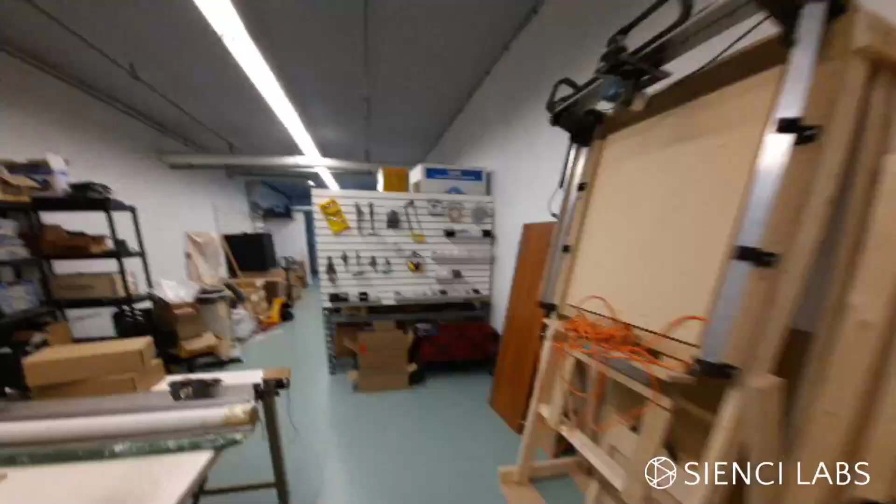You probably are used to seeing our old setup, and we worked a couple late nights in order to move into the new area as quickly as possible. You can see this is our new shop area. Tools and whatnot.

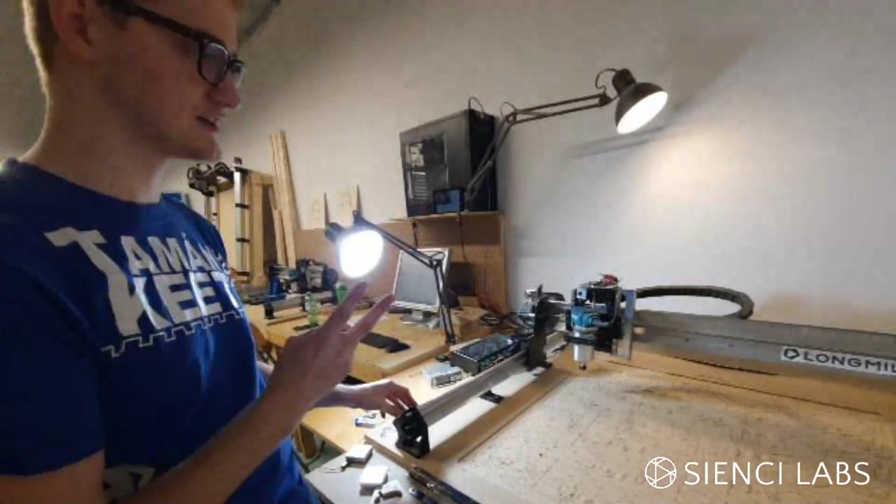So this is our machine setup, and whenever you're coming fresh to your machine, there's a couple really important things you want to check to make sure it's operating properly. It has to ensure nothing's going to fall apart while you're cutting, and also that your machine is going to be working as precisely as it can. The two primary things are the anti-backlash nuts and the V-wheels.

So usually what I like to do is go around and push back and forth on the gantries of each axis. I'm not sure if you can see it, but this is actually wiggling back and forth a little bit right now, ever so slightly. You can feel it more with your hands, and you can kind of hear it as well, that it's got some movement back and forth.

So I've got the sized Allen key to use, and I'm just going to stick it into the set screw in the back there, and tighten it just a bit, a small amount, and then go and feel it again. It's still rocking just a little bit, so I'll give it a bit more of a turn, and it's still rocking a little bit more.

I think you're rocking the table. There we go. Now it's tightened up, I can't hear any looseness, I can't hear the rocking sound anymore. So now I know that the anti-backlash flange is actually tightened up against the screw, and this is going to ensure there's no looseness in the cuts when I'm making the cuts.

So now that I've checked that side, I want to make sure I check the other sides as well. This one also is a bit loose, you can barely hear it. So I'm just going to go in and tighten this down. There we go.

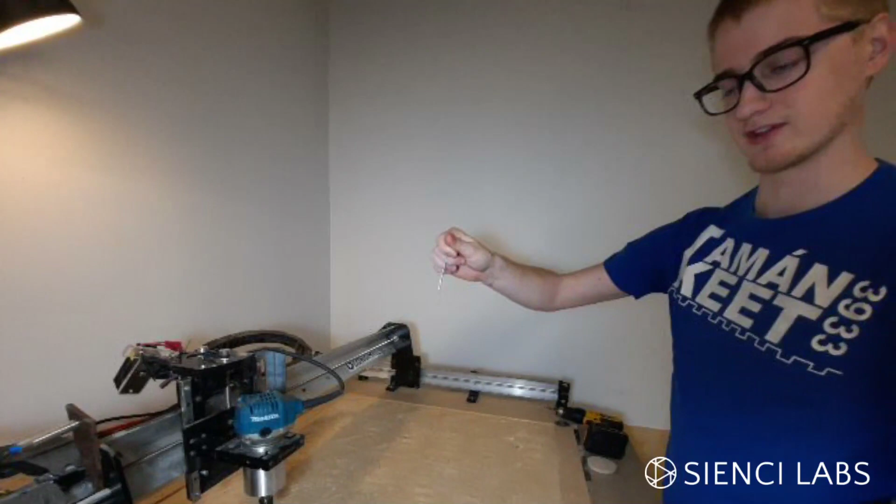There's really no hard and fast rule here, other than you don't want to over tighten it, and that's why every time I'm feeling these out, I'm rocking it and making sure it's still loose, then tightening it the smallest amount of a turn, feeling it again, turning it the smallest amount again, and I just keep going until that rocking noise is gone and I can feel it's not moving back and forth anymore, and that's where I know to leave it.

So I'll do it on the Z-axis. Z-axis is very tight. X-axis is also tight. So those anti-backlash nuts are all tightened.

The next thing I want to go around and check is the V-wheels. For that I need the larger size Allen key here. Where's the Longmill wrench? Let me see.

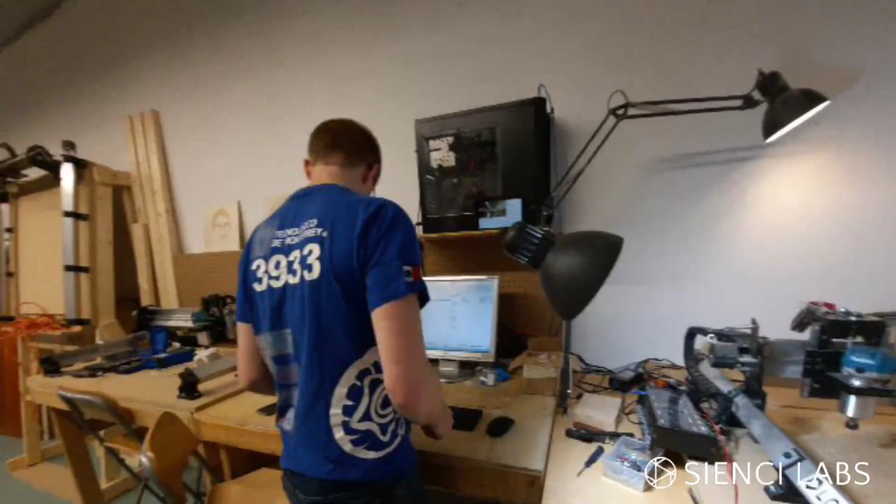You want me to just use a regular wrench for now? Yeah, I suppose I don't actually... use this guy. I suppose I must have lost our Longmill wrench somewhere in the move, which sucks.

They're very, very handy for doing these adjustments. Alright, so I have my 4 size Allen key and my 8 size wrench. So when I want to check the tightness of the wheels, this is something you're going by on feel. The feel is basically, can you move the wheel with your hand so that it's not really easy, but it's not impossible to move either. And so I'll start again on this gantry here.

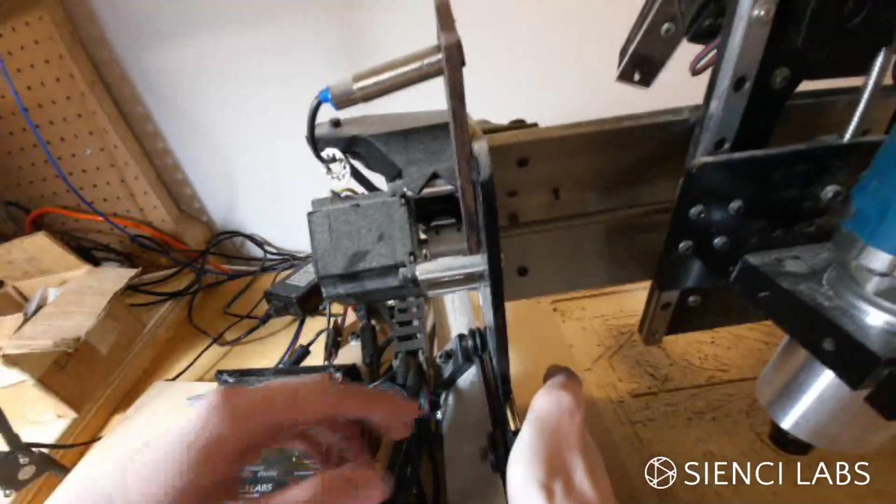What I'm going to do is check the top wheels first. When checking the top wheels, I'm actually going to pull up on the bottom of the gantry to alleviate some of the weight that's on the gantry, because the wheel might feel tighter than it actually is if the weight of the machine is pressing down on it. So I'm just going to hold it up and go to twist it. This one, I have to work kind of hard to twist it, but it still rotates.

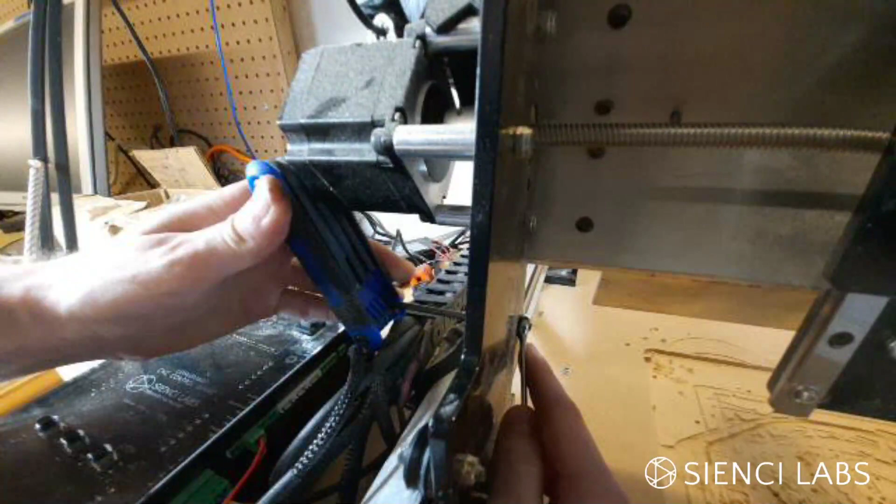And I'm going to try this back one here. This one I can twist quite easily actually, so I can tell this one is loose. What I'm going to do then is stick the wrench on this side and the Allen key on this side, and open the wheel up. I'm going to loosen it, then rotate the wrench just a little bit and tighten it back down. As you guys know, by rotating the wrench, it uses the eccentricity of the nut in order to clamp down better.

And now I'm going to go feel this, and it looks like it's still a little loose there. So once again, this is one of those things where you just kind of take your time with. Let me see here. Let's see if I've got it good there. Oh, that's still quite loose.

Okay, now that I would say is a little bit too tight. I have to really try to rotate that even when I'm pushing the weight up off the machine. So at that point, I can just back it off a little, tighten it back down, and now that's at a good tightness.

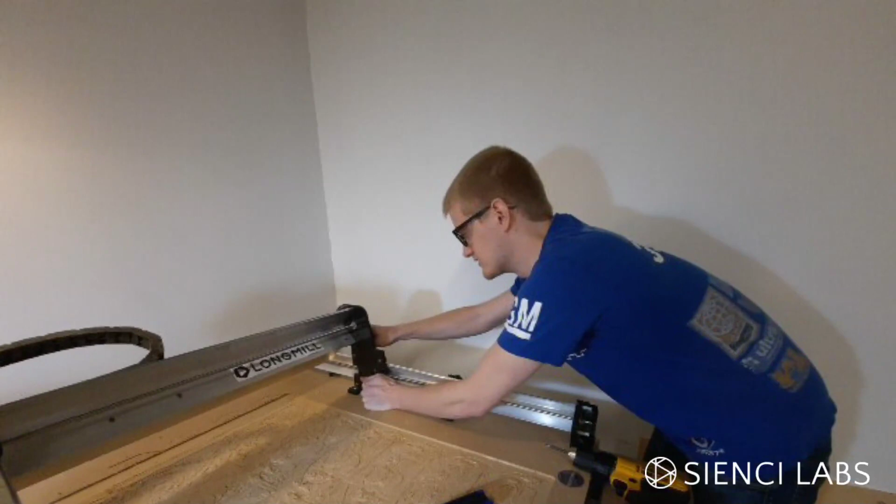Let me just go and check the other wheels to make sure everything else is good. Oh, this one's quite loose. Back one here is good. There's probably some looseness in our setup here because the machine moved around quite a bit to get it from the old space to where it is now. So that has an effect on it as well.

The reason you only need to check one side is because if I'm pushing up to negate the weight of the machine on the bottom, then as long as these top two feel good, once I let go, the bottom two should also feel good. If you'd like, you can also double check the bottom wheels — they should also be able to move quite easily.

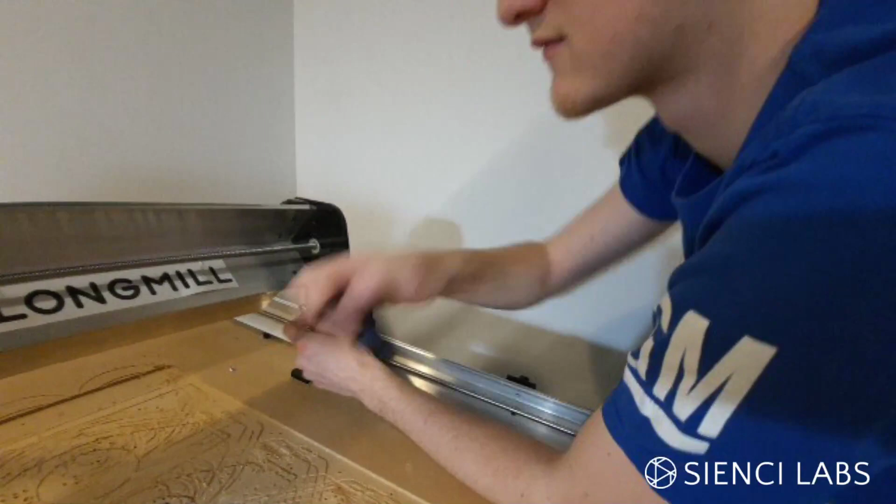Actually, I can feel this back wheel is very, very loose, and that means I should be tightening down the top some more on this wheel here. Okay, I might have gone a bit overboard on that tightening. A little bit less than that. Yeah, that's good now, okay.

And I'll just double check these wheels here as well. Okay, yeah, these are all looking good right now.

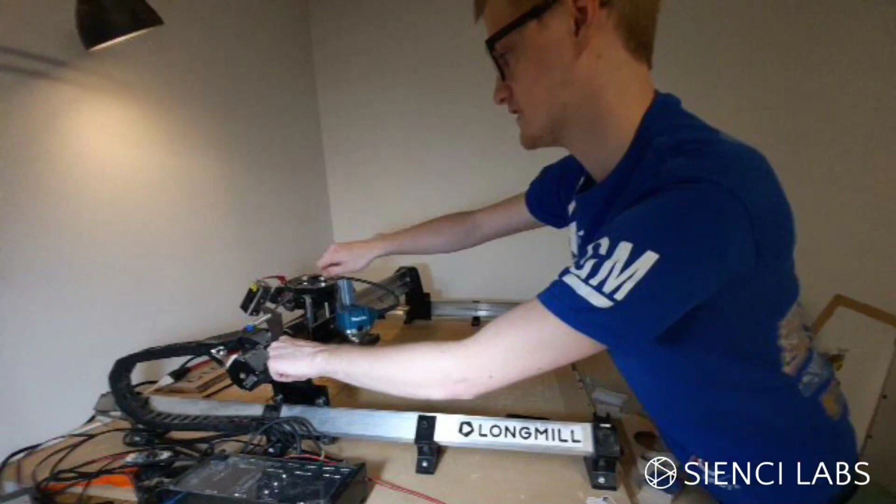So the other thing you want to check as a maintenance run — well, there's two other things. One is looseness in any of the parts, and the other is the cleanliness of the rails. For looseness of the parts, you can mostly just go around to any of your general components and try to move them around. I usually focus on the drive systems.

Most of the components are held in with nylon lock nuts, and if you assembled them with Loctite, then that would also be held in place as well.

I think the only parts that come loose more often than not are maybe the bolts that hold the dust shoe mount in place. But yeah, you can see that was very quick - I just went over and felt if anything was loose, and it all seems pretty tight.

The last thing I'm going to have to do now is clean the rails. These ones aren't very dirty right now, but if you can get a close shot, you can kind of see the blackness on the rails. Oh, you can see it at the back there much better.

So you can see there's kind of this - here, can I show it from this side? Can you see the blackness here on the rail, these little specks?

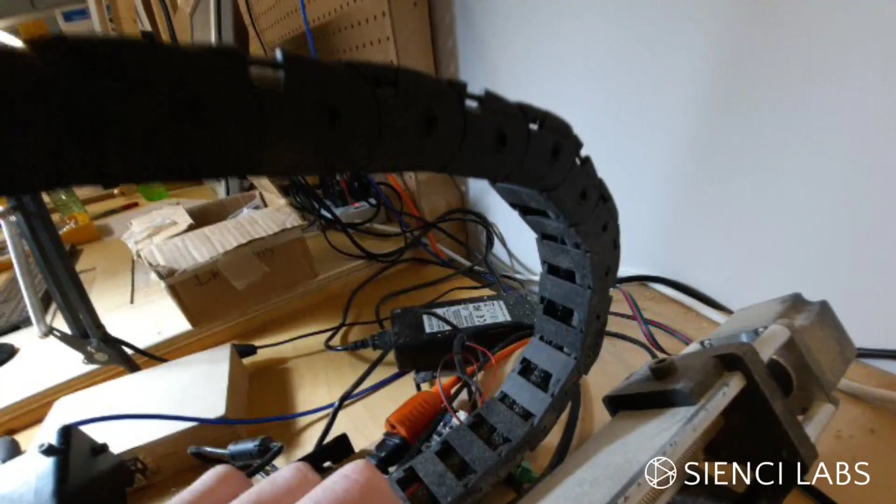This is mostly coming from dust and debris that is flying off when you're cutting on the machine, landing on the rails, and then the wheels pack these down onto the rail. But it's very easy to remove. Give that back over to Andy.

The way you need to remove it is you just use any dull object you have on hand. You can use a plastic scraper, a toothbrush, something like that. I actually use these wooden discs because they come out in the middle of the dust shoe.

The thing you just don't want to do is use a steel tool or something like that, because then you're going to start to mar the aluminum. But basically you just want to go around and push against the particles that are built up on the rail, just to knock them free.

And you can see that they just kind of fall off quite easily. I'll do that at the back here too.

The reason for cleaning off the rails is just because if it starts to really build up - like the current state on our machine, this is probably completely okay.

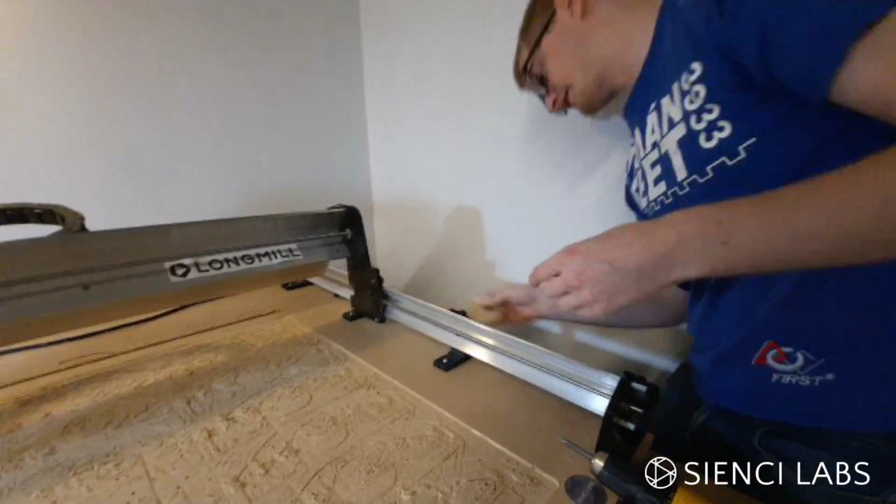Now, once again, this is directly correlated to how often you're using your machine. If you're not using dust collection, then you're going to have to do cleanup on these more often than if you are using dust collection.

You can see it's kind of built up here on the disc, and you can see the particles are kind of loose on there. But yeah, that's about it. You should be able to put your hand on the router here and move it around and feel that everything's quite tight now - nothing should be able to move around.

I think the only other piece of machine maintenance that you do much more occasionally than this main set of steps is occasionally resurfacing your spoil board, which would probably be a good idea for us.

This is a very well used spoil board. So those are the steps that I can think of for now.

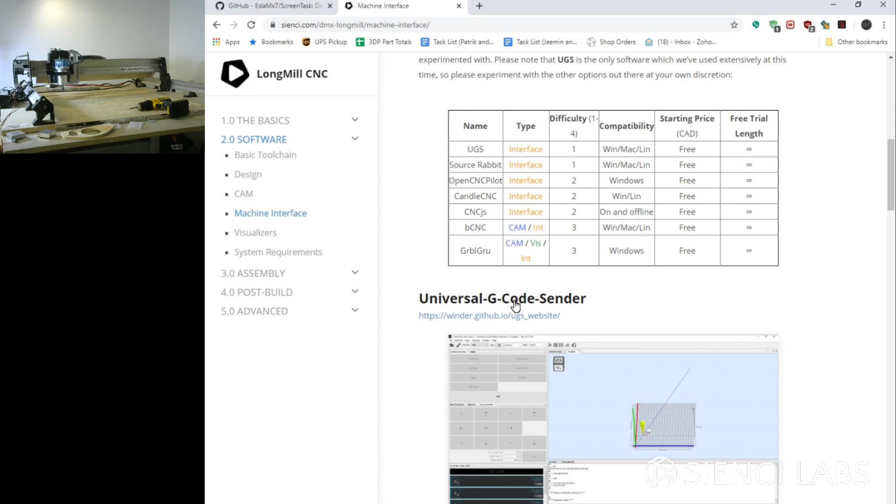Before I dive into this, I want to remind you that there's actually a page on the resources that shows a list of all the different interface softwares that we've tested with our machine and that you can use. If you don't want to use UGS, you can use one of these other ones, and they have their perks. Some people prefer one over the other. I know a couple of our customers really like using CNCJS, but keep in mind that it's a web-based sender, and some other people like using bCNC or Candle. We prefer Universal G-code Sender, and that's why we show you how to use it. So check this out if you want to try out another G-code sending software.

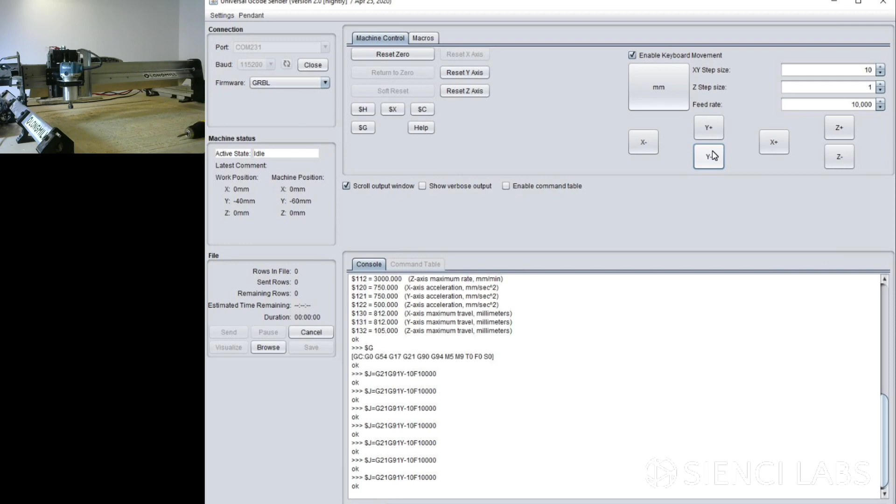Okay, so if I press Y minus, you can see that it's moving by 10 millimeters at a time in the Y minus direction, which is towards you. And if I hit X plus, that moves the X axis in the positive direction, which is to the right.

If I hit Z, you can see it's moving by just 1 millimeter up or down. You can kind of just toggle this around, and that's very simple machine movement that you're achieving.

If you want to move a little bit faster, you can click it a bit more, or if you'd like to set this to a lower number, like 1 millimeter, you can press and hold. Actually, I think I have to set it to a minimum of about 5 millimeters.

It'll just keep jogging based on the quantity you enter in. So if you want faster movements, you can set it to a larger quantity and make it jog by that amount. It's quite simple—this allows you to generally move your machine around to different locations when starting your cutting job.

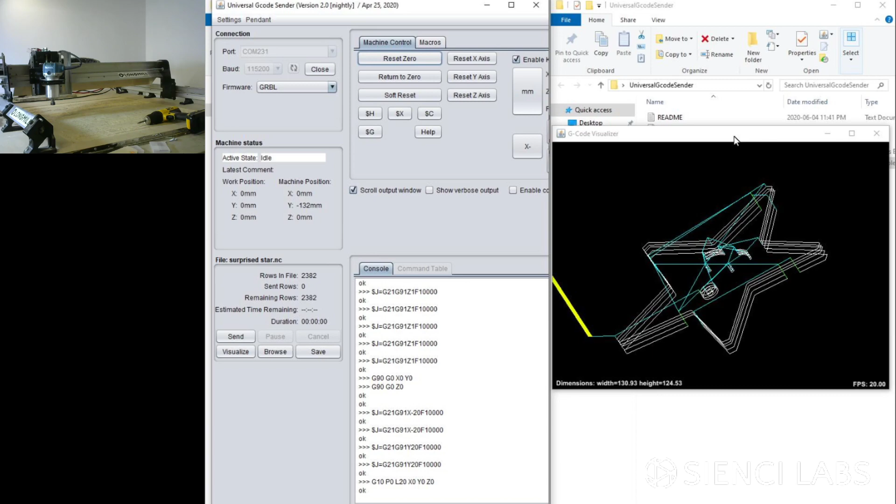Anyway, I'm not going to talk anymore about this because most of our customers use UGSPlatform, and I'm going to explain more of the functionality in UGSPlatform. So I'm just going to close the connection, close this up, and open up UGSPlatform.

Do you want to take a break and show them the vertical? Well, are people asking about that? Okay.

Yeah, so I'm making - how are you, Louie? You camera shy dog.

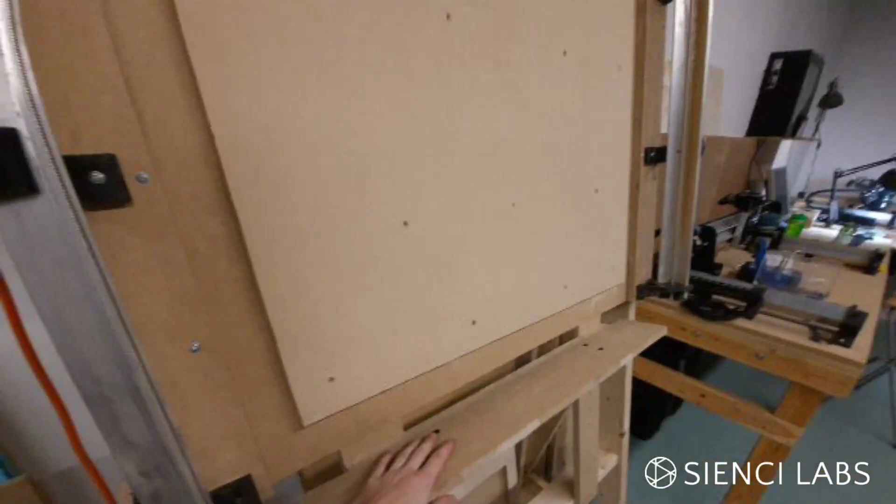This is a vertical mount system that I worked to put together. I am going to be making a video on it - well, I've already started working on the video, and I'm going to be releasing that as soon as I can. It's very nice and solid setup, with a good sized waste board. You can see that even with the power off to the machine, it's on just a slight angle and able to stand up on its own. It's also got a little shelf here, so that when you load the material onto it - the thing about a vertical setup is it's hard to hold the material in place while you're finding a way to fasten it down to the table itself. So I've got this shelf, and it's actually got adjustable height, so if your material is a little bit longer, you can toggle the shelf height accordingly. It's also nice to hold your tools and stuff up here while you're fastening everything in place.

All right, back to the regular programming. Your regularly scheduled program.

Okay, so you can see that UGSPlatform is loaded up, and obviously it gives me the message as well.

For UGSPlatform, we use the nightly build of version 2 for November 15th. That's the one we've been running for a long time. Some people ask which one we use, so that's the one we use. But the one that's on the website is from August - I think that one's just a random one, kind of more of a random one. I think, since it's constantly in development, each version of UGS, the nightly build, will have certain issues with it. But this is the one that we've just been running.

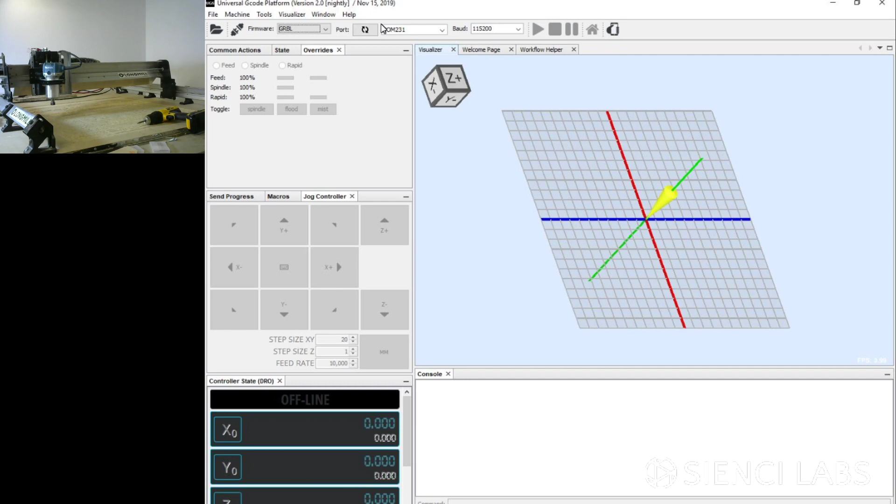In case you're wondering, I wanted to show that when it comes to UGS, you can either go to their downloads page and get their most recent nightly build, or the previous stable versions there. Or if you go to the GitHub, you can also download previous versions of it as well.

So I've got UGSPlatform open. You can see that there's a little bit more happening here. It's why I wanted to start with UGS Classic, because it's a bit more digestible. But by having a lot more content, Platform also has a lot more in terms of features available to you, the user.

So first you want to start by connecting to your machine as we did before. We're going to start at the top here, hit refresh, toggle down, we can see the machine here, and then we're going to go over to this little plug symbol and plug in. We're going to connect to the machine. Once again, you can see it's popped up here, our opening message, and we've got this little orange symbol that has appeared showing that the two ends are plugged in, which means we're good to go.

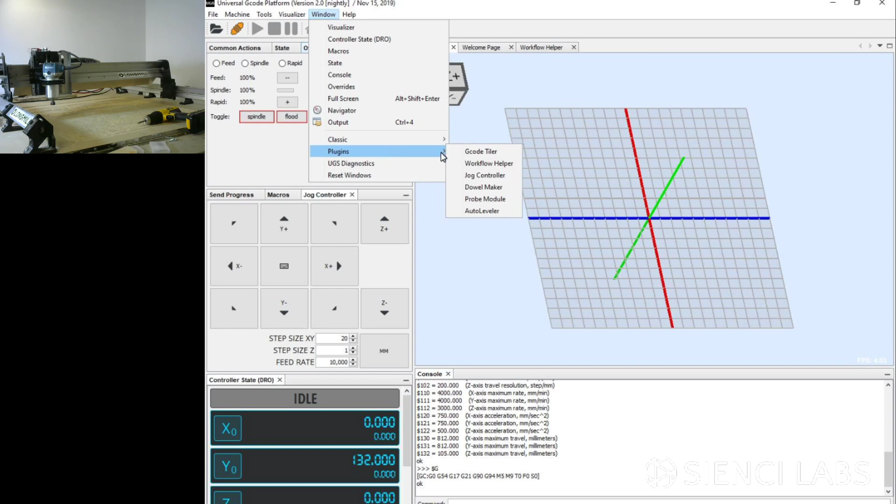If at any point you don't see a window here that you need, for example I don't see the probing module here, I can go to the window menu, go to my probe module, click that, and now you can see it's going to pop up here.

You can also get rid of any of these windows at any point and drag them into different positions. For example, I don't think I really need this welcome page, although you might want it, but I'm just going to get rid of it. I don't think I need the workflow helper. I like having the visualization window quite large, but maybe not that large, so I'm going to grab these lines here and stick it into the corner. I use jogging all the time, so maybe I'll grab this and make it a tab up here.

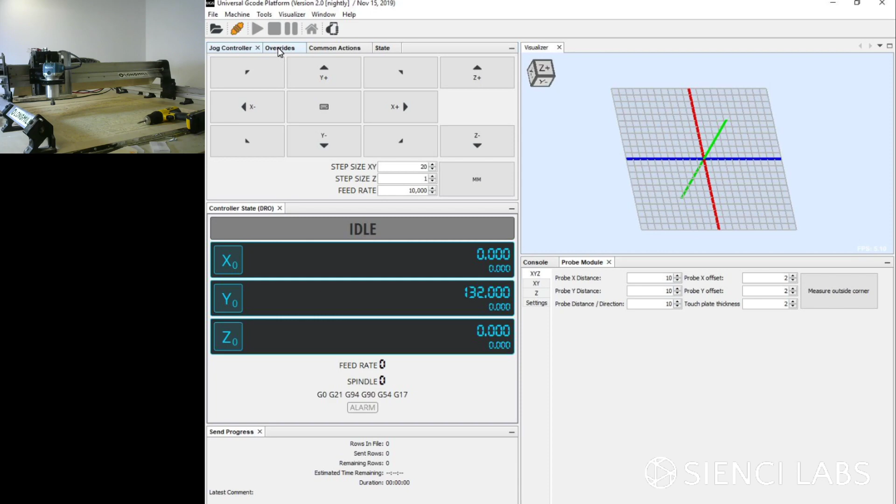I don't tend to use macros, so I'll get rid of that. I like to see my controller state, so maybe I'll make that a window further up here that I can see more easily. Overrides are quite useful, so maybe I'll make that a tab closer to my jog controller. Common actions are also quite useful, so maybe I'll make that its own window down here. You can see I can do basically anything I'd like to make this work the way I want it to.

So let me explain. Now that I've set it up in a way that I tend to use UGS, I can explain to you the use case for all of these. Up here you've got your jogging, which is the same as what we used in UGS Classic. And here you've got your machine state, which is also available in UGS Classic. It's going to show you where you're currently positioned. You can see I've got my visualization window here.

If you would like to reset your axes, you can just click these buttons here. Right now it thinks the Y is at 132, but I want to set it to 0. Now you can see that yellow point is set to the 0 point. You can also tell it that it's somewhere else by typing a position in if you'd like, and you can see it's now moved it up by that amount. But I'm going to zero it.

This is the progress as the file's being sent, and these are the common actions once again. I think that's pretty straightforward.

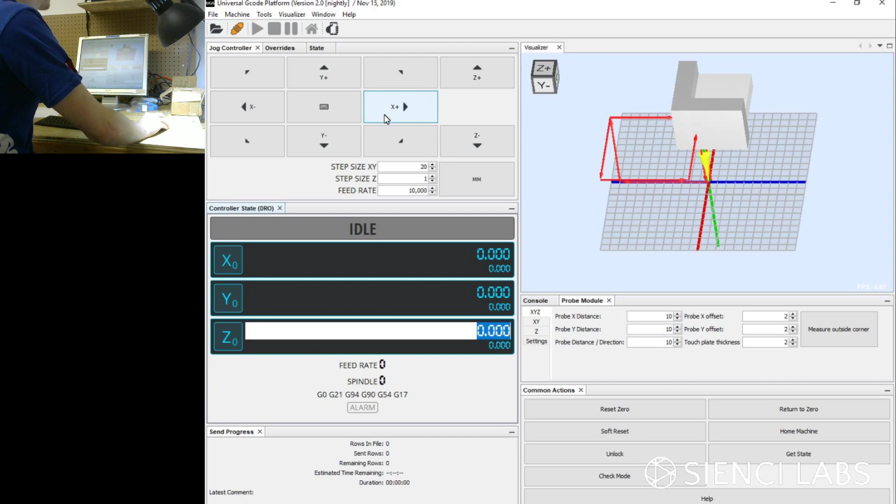What I like about UGSPlatform is that when you go to jog the controller, it's set up so that when you press and hold a button, it'll do a constant jog, and as soon as you let go, it stops. This is very useful because you don't actually have to set your step size if you're just jogging the controller or your machine around. You can set it up wherever you want by just pressing and holding the buttons, and you can do that in any axis. That's quite a nice feature, and it means you don't really need to bother about setting your step size. You can just move it around as you need and place it where you want.

Is there anything? Do any of you have any additional questions about the software? I'm going to explain the probe module in maybe 10-20 minutes, and I'm also going to run a job so you guys can see me actually using UGSPlatform to run a job. But for the time being, is there anything you want me to point out?

I see, Keith, that you want me to show off the pendant feature. While I'm waiting to see if there's any other question coming in, I will set that up. Let me see if I can get it working.

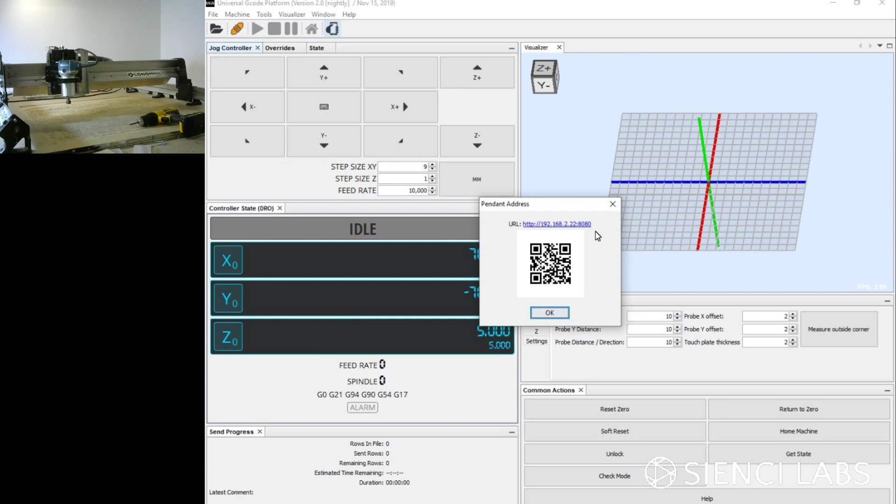I've just opened up my web browser on my phone, and it's set to the same IP address as what's on UGS. So if I click enter, it should be able to find it here. The Wi-Fi here is a bit slow, we're kind of in the other room. Oh, there we go.

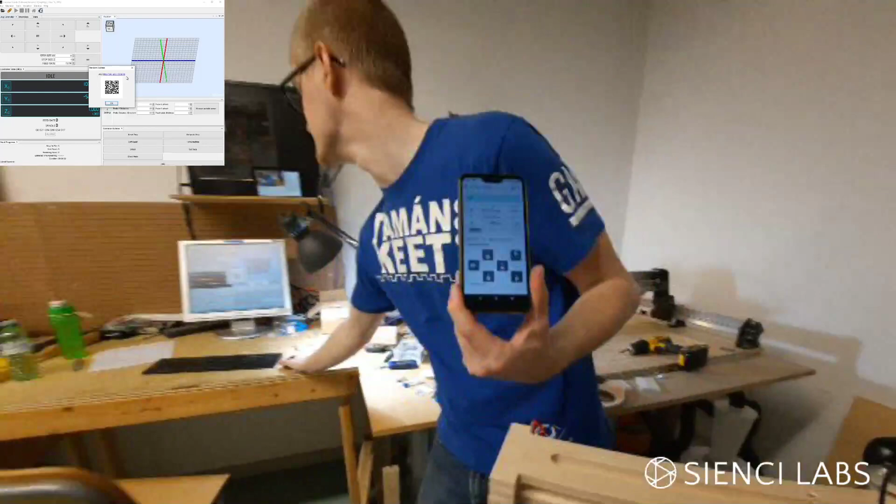You can see you've got a more generic layout here, but you still have tabs to jog, do macros, and send files. If I click jog and press on the X or Y, you can see this is fully controlling the machine, and I'm also getting live feedback on its position. If I close the pendant window on UGSPlatform, the coordinates on my phone match what show up on the computer. And if I jog here, the computer recognizes it as a jog, and the coordinates change appropriately. I can also reset my zero and set my feed rate. I'll reset the zero here, and now you can see on the computer it's also recognized that I'm back at the starting point.

Let me see. All right, well, I guess I'll move on for the time being. I think if you have any other questions that come in, I can answer them.

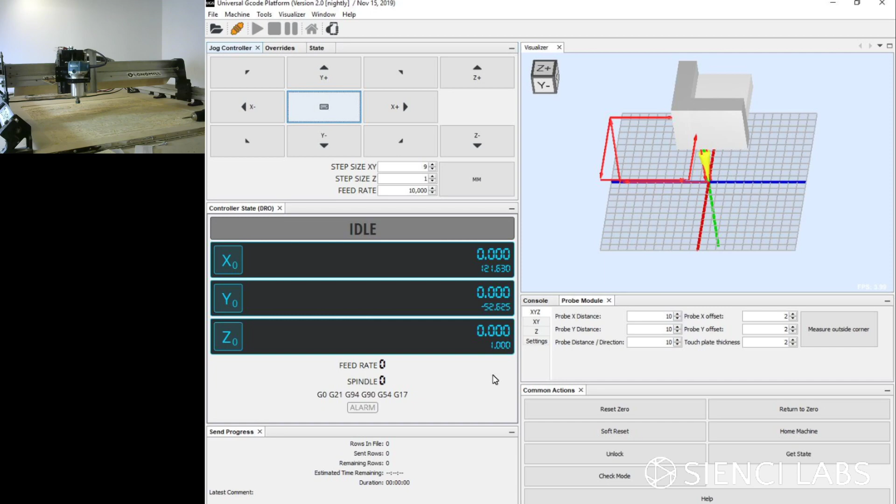What I wanted to show you guys is I was just going to briefly talk about work holding methods. I was going to talk about the bits that we use, and I was also going to show you the touchplate.

As you probably saw before, the go-to work holding method that we like to use here, and as you can also tell based on the number of holes in our wasteboard, is we like screwing things down. It's quite easy, and it allows you to mount things in place without having to really think about it.

Unless you go and drill or cut into where you drilled your holes, right? Yeah, the only downside is you kind of have to be aware of where your screws are when you're cutting, because your bit can run into the screws. So some people might not feel confident about that. I can tell you it still occasionally happens with us, so don't be embarrassed about it.

You know, it's life. That's life. Sometimes you break stuff, and usually when you break stuff, you learn from it. But this is the type of method that I like to use because you can run into problems, sure, but it's also just so easy. It's so easy to just screw it in, and now it's held in place, and you can do what you want to do.

There are some other methods that exist. I don't have too many props with me, but you can use double-sided tape. You can use painter's tape on your flat sheet, and then painter's tape on your spoil board, and then you basically just stick some super glue in between. And if you have an activating agent, you can put the super glue on one side and the activating agent on the other side, and then you just stick them together, and it holds really well. For sheet material, that's a really good method.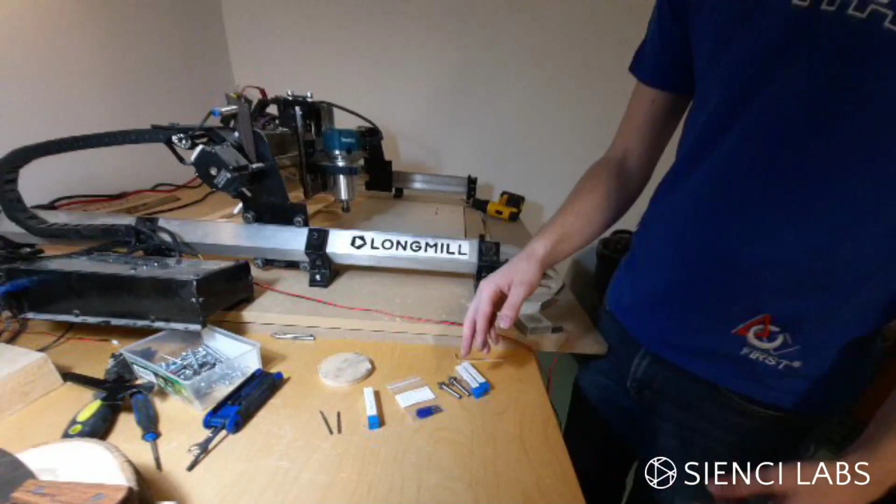Let's take a moment to talk about cutting bits. I've set up some of our cutting bits here, as you can see. When it comes to cutting bits, we stock either 1/8 inch bits, which is these guys here, or 1/4 inch bits, and this is the shank diameter on the bits. The Makita and many other routers by default have a 1/4 inch collet in them. Oh yeah, and the surfacing bit, here's the surfacing bit. We also supply these 1/4 inch to 1/8 inch adapters that allow you to use the 1/8 inch bits.

Let me explain why you might want to use some of these bits. Let me see if there's any other questions. Okay, still no other questions. So the type of cutting that I do, which is usually more functional stuff, like cutting through and making stuff. Do I have any other examples here? Actually, let me go grab some examples real quick.

Oh, we're going on that. Hey, wireless camera, wireless, let's do it.

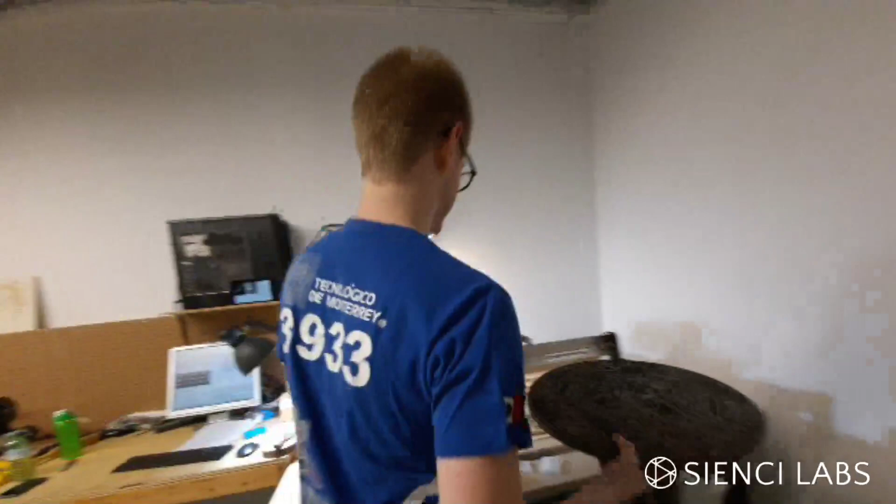Okay, I'm trying to be as thorough as I can here, but if I'm missing anything or if you have any questions, please ask me, because I would really like to be able to tell you guys what kind of bits to use in what situations. I'll start again because I don't remember how much of it you heard, and I've been talking for a while, so who even knows what I said.

Step number one, we got a surfacing bit. Surfacing is for surfacing, that's basically all you use it for. You use it for setting up your spoil board to make sure it's nice and flat, or for flattening large material.

Like this. This is a large piece of raw wood that has been completely flattened. Wow Chris, that's a very flat piece of wood. It is a very flat piece of wood. And that doesn't have any sanding or anything on it, that's just how it came off the machine.

Yeah, surfacing is for surfacing. Alright, that's one bit out of the way. Boom.

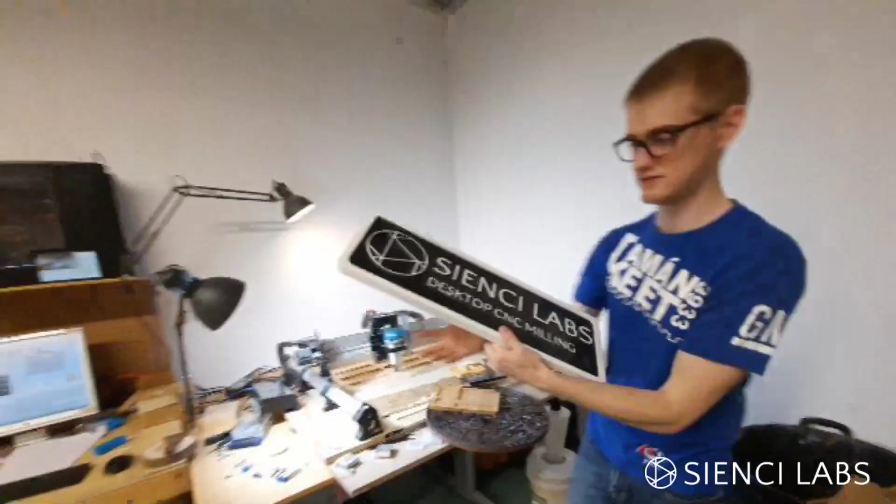This is like an example of what you can do. You cut out this perimeter with a 1/4 inch bit, you cut out the little inside of the tray and the holes here, or this sign here where you've kind of got this raised lettering.

You use the 1/4 inch bit to rough out the material, but then for the small inside edges and the small lettering here, you would use an 1/8 inch bit in order to cut out all this detail that you need. And then you'd certainly use a 1/4 inch bit to cut out the perimeter to finish it off. This is just a single piece of MDF, and then it was just hand painted on the top.

And this is an example where if you have an even smaller bit, you can cut really small geometries like this. This is like a pendant that you can use for an earring or a necklace or something like that.

Ball mills. Let's talk about ball nose end mills. With the ball nose end mills, those are when you're trying to get more detail and make some really neat looking things. So you can do something simple with a ball nose end mill. I'll come back to this.

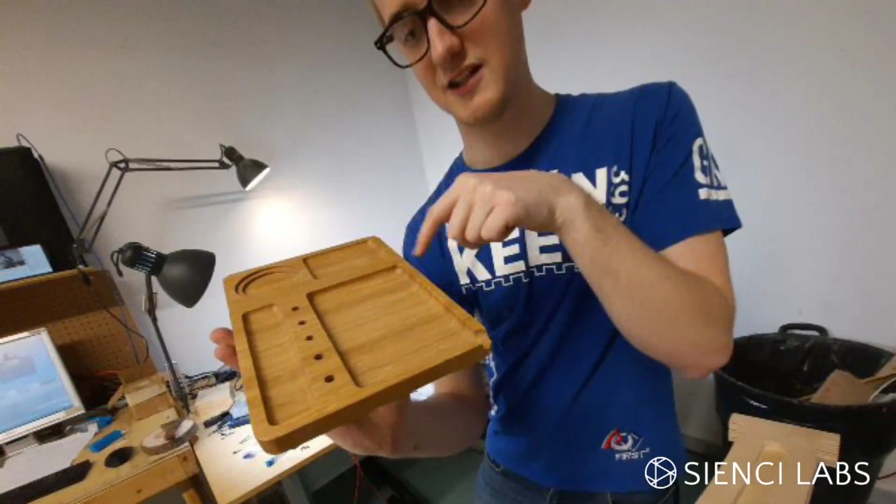This tray, you can see it doesn't have flat corners. It's not sharp corners at the bottom of the tray. They're actually rounded here, and that rounding is produced by just running a ball end mill around the perimeter. That can add some nice touch to your project. I believe this slot area here was probably also cut out with the ball end mill because it's nicely rounded and has a good contour to it.

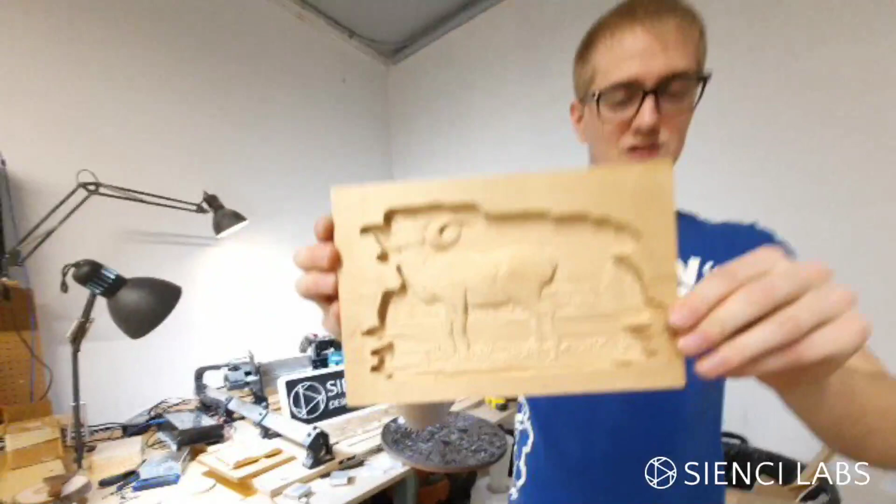This is cut with a 1/4 inch ball mill. This is cut with an 1/8 inch ball mill. Did you use the tapered ball mill for this? No, that's an 1/8 inch ball mill. Oh, I used the tapered one for this one. Then you can get stuff like this using the tapered ball mill. Cool.

Tapered ball mill comes down to a 0.5 millimeter radius at the end.

Are there any questions? How do you make a wasteboard with T-nuts? Oh, okay. I will get back to that.

Last but not least, V-bits. We've got actually 3 types of V-bits. We've got the 90 degree and the 60 degree, which are very useful for sign making. And then we've got the 30 degree, which are for more precise work.

I feel like not a lot of you would benefit from using the 30 degree. They're very useful for cutting really small and fine detail. The Lake Ontario lettering was done with the 30 — yeah, that's in the other room. So if you've got really small and intricate hand lettering that you want to engrave, then the 30-degree V-bit would be useful.

The thing about it is, if you've got really thin lettering, then if you're using one of these guys, they can only penetrate just the smallest amount in order to get that width. Since you don't get a lot of depth to the cut, it doesn't make the lettering as clear. So that's when you start working to reduce the angle. If lettering isn't coming out clear on the 90 because it's a bit finer, you move to the 60. And if it's still not fine enough, you move to the 30. That's kind of how that works.

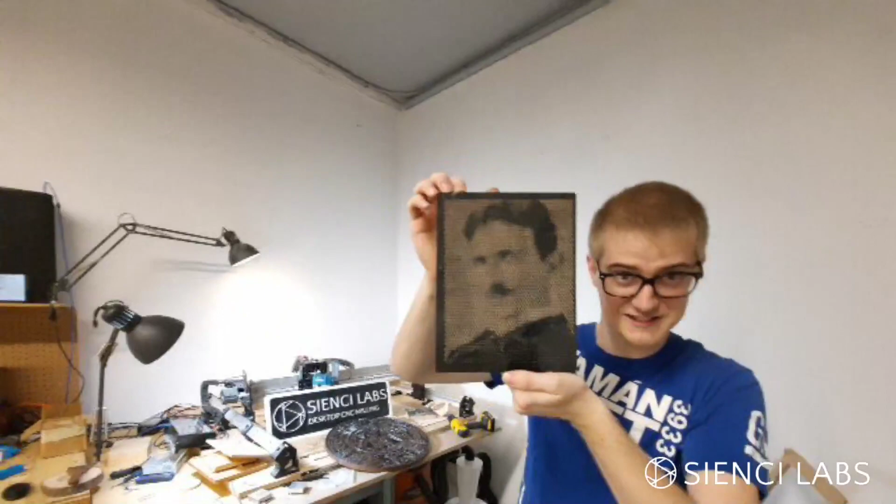You can also do stippling, like that. This is basically cutting out different size holes in order to cut out an image. Yeah, Nikola Tesla, inventor of the electric car. I don't know if you guys have heard of him. He's kind of all the rage nowadays.

Can you talk about upcut, downcut? Oh yeah, I'll talk about that. Let me clear this out.

You can also do stuff with these cut out with an 1/8 inch end mill. No wait, those are 2 millimeter. Oh yeah, sorry, 2 millimeter. I think this one here is probably the 1/8 inch. But you can get some reasonable detail with smaller end mills as well. Just as easily, you can make these with a V-bit, so it's up to you.

Okay, I will speak on upcut versus downcut. I've got a piece of sample plywood here. So we sell some of our bits in both upcut and downcut flavors. The differentiation between them is basically where the sharp edge is. For the downcut bits, the sharp edge is shearing the material downwards, pushing and shearing it in a downward direction. And the upcut shears the material upwards, pulling it in an upward direction.

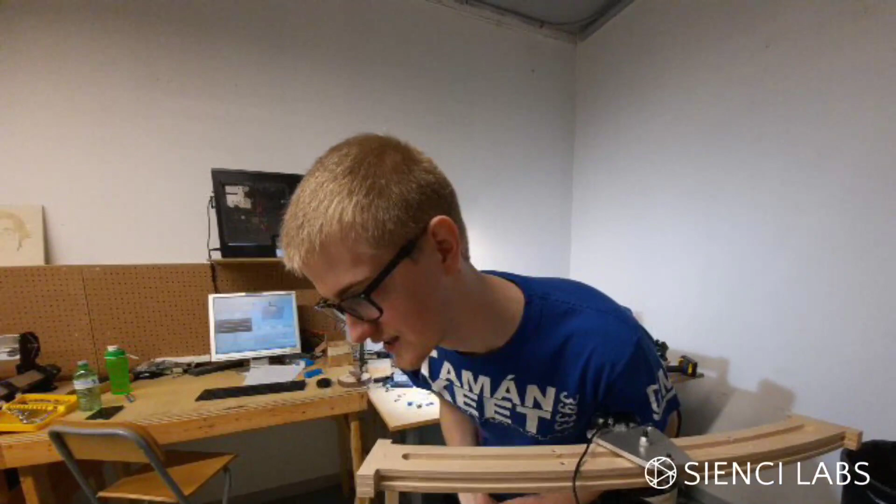Does Carbide Create tool libraries for the CNC bits? No, we don't. I don't know if we can make it. I'm pretty sure if they use the default, it'll work fine, size wise. But the speed I find that they use on the Shapeoko is maybe half to a third the speed I usually run it at on a Longmill.

If people need to find recommended feeds and speeds, the ones we have on our website are good conservative starting points they can use in general. I think we have the general size of the tool and the speeds listed there.

Okay, we'll wait. Oh, thank you very much, Peter. I'm glad you thought my explanation was clear. Let me have some water here. We'll just wait to see. Just so you know, when you say something, there's like a 1 minute delay. Yeah, I know, that's why I'm waiting. Yeah, so you gotta wait.

You should show your face to the camera, I don't think people have seen you yet. I don't know if I want to scare people. Let me see here, I'm just going to bring up a page. I'm just a guy trying to have a steady arm. I'm betting the people watching the live stream think I'm having a seizure. You're having a Caesar salad? Seizure. Seizure? Seizure.

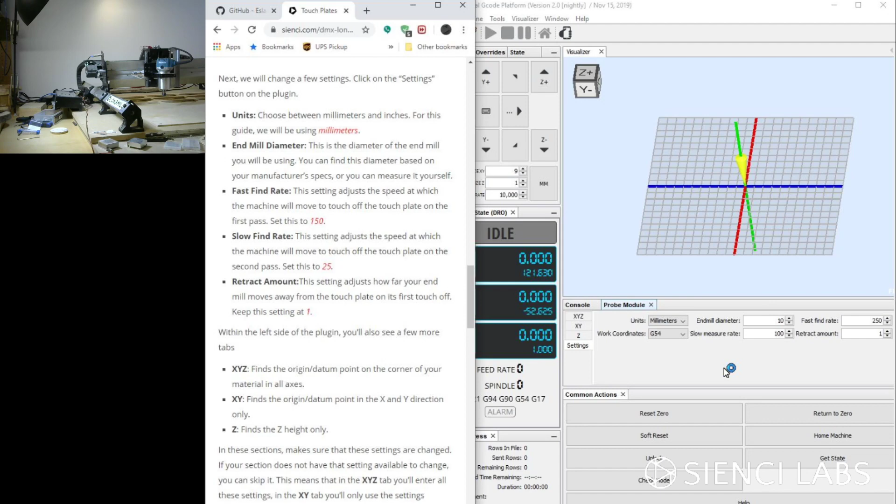And I've brought up the probing module here so that I can see everything. And now I'm just going to enter in these values.

Set my units to millimeters. Set my end mill diameter. I'm going to be using a 1/4 inch bit for my setup here, so that's 6.35 millimeters. My fast find rate, set it to 150. My slow find rate, 25. Retract amount to 1. And the work coordinates are set to G54 still.

Now the offsets and distances. These need to be set for all the tabs separately, so I'll start with the XYZ first. My probe X distance is going to be 25. The Y distance is going to be 25. The X offset is going to be 10. The Y offset is going to be 10. The direction is going to be negative, make sure it's negative, guys. And the thickness is going to be 15.

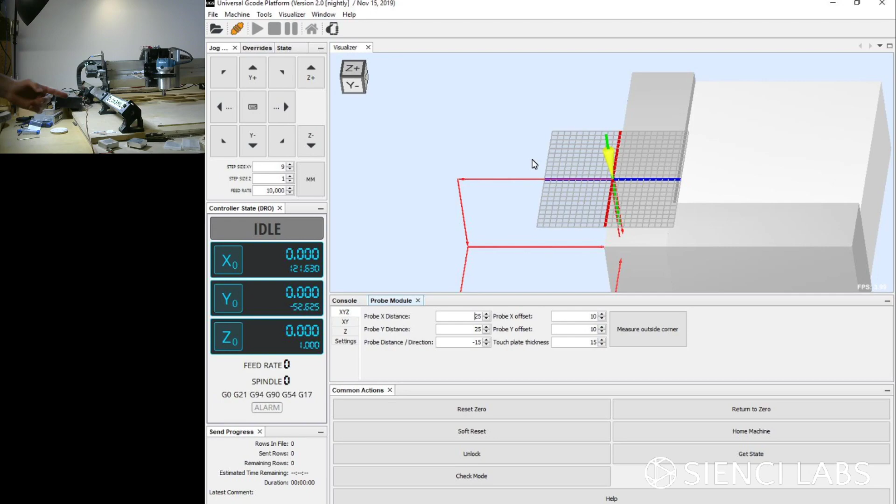Now let's do a combination screen view and machine view, but emphasize probably the machine view.

I've got my touch plate plugged into the probe pins on the longboard controller, and you've got your 2 wires coming out here. So there's the magnet, and there's the probe itself, and the banana plug. You can plug it into either side of the probe, here or here. You need to make sure that these are contacting each other.

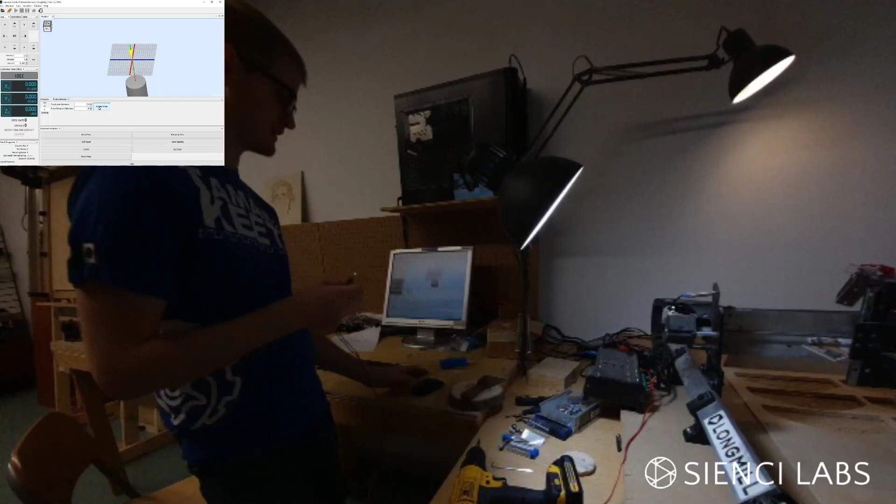And so if you're ever concerned that they might not be working, what I like to do is go to the Z probing on the computer here, and I'll have these contacts with me, and I'm going to click to initiate the probe. I'm going to raise up my Z axis nice and high as well, to make sure it doesn't run into anything. And now I'm just going to initiate the probing.

When I initiate the probing, I'm going to tap these two guys together to see if it's contacting properly. This should be happening 100% of the time. So if this is ever not working, that means you might have a wire loose here, or at your connector here. So I'm going to initiate the probe.

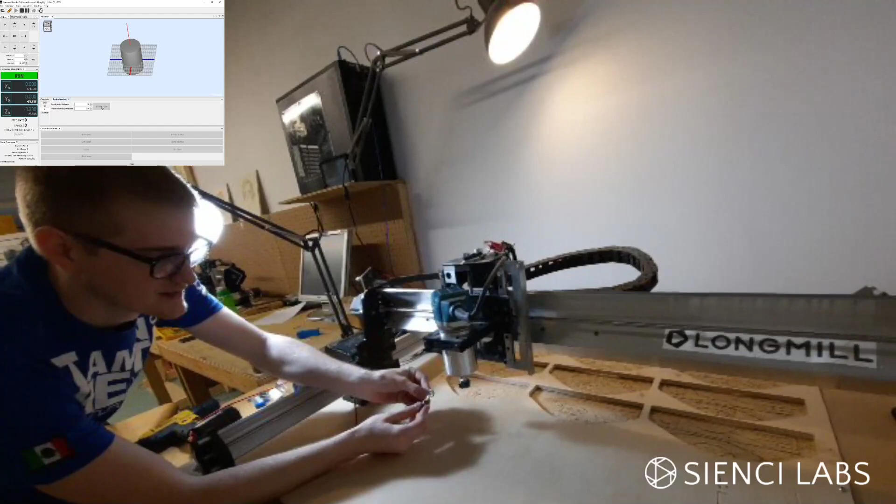And you just tap it twice. So it's seeking right now, so I tap it once, and then it goes to find it again. I'll do it right next to the machine so you can see. I'll initiate the probe. That's the first hit, and then it goes to find it again, and that's the second hit. So you can see that it's working as it should be, which is very good.

Okay. Yeah, okay, so I'll get to showing that.

Okay, so I'm going to grab just a block of material over here. Let's go with this guy here.

For now, I'm just going to screw it down. I'll try to screw it down kind of out of the way, so that I'm not ruining it. Actually, I could probably do it over here. That part's already ruined.

Okay, I'm going to bring the x-axis over. You sure you don't want to use the one that you can actually see the things on? Oh yeah, we can use this. That one's like, what? I don't know what happened to that one. Did you try to sand it? Yeah, I think I was sanding that. You needed an end mill on it. No, I don't. No, I'm just kidding, guys.

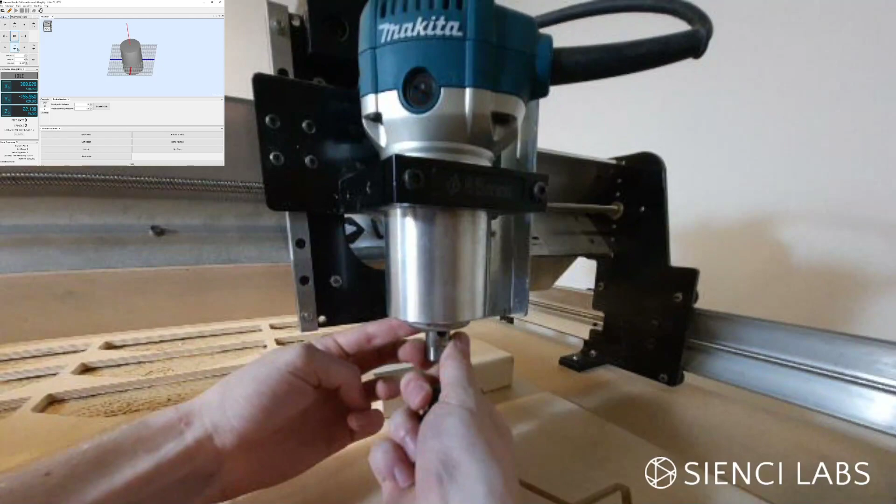So when it comes to putting an end mill in, there is a button at the back here which secures the collet in place, and then that'll allow you to rotate the nut freely because that locks it in place. So right now we've got our 1/4 inch collet here. So if I were to put in a 1/4 inch bit, then obviously this is going to fit very nicely.

But if I want to put in an 1/8 inch bit, then that's when I'm going to have to use this adapter. So usually when I'm putting the adapter in, I take the collet out so that I can make sure that the adapter is seated approximately like this. This just allows, because the nut has a bit of thickness to it, this just allows the adapter to better support the 1/8 inch bit at the surface there.

And then I also stick in the 1/8 inch bit. You want to stick it in as far as you can go, so that it basically is supporting the whole shaft with the bit. Only if you're making deeper cuts can you bring it out a little ways, but really this is the furthest out an 1/8 inch bit should go to make sure it's as rigidly mounted as can be. And then I stick it inside the nut here, I hold the collet in place.

I usually put the end mill into the collet first and then the collet into the big collet. I think you can do it either way. The reason I do that is because sometimes if you don't have a good quality bit and the shank diameter is not accurate, it's harder to get it in. It depends on the tolerance on the shank of the bit, but yeah, you can do it.

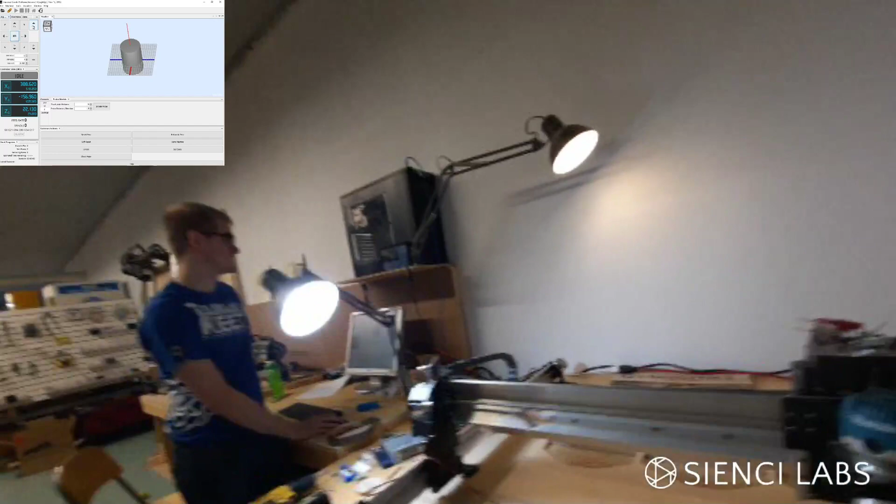Looks pretty good. I'll just move it a little bit. There we go. Okay, so...

I'm going to demonstrate how to probe in all the different ways that the probing module allows you to do, and then I'm going to explain when you would probably use those different forms of probing.

So first I'm going to probe in the X, Y, and Z, all three of them. When you want to do this, you basically set up the bit so that it's roughly located above our logo, the circular logo, and offset by a small distance as well. Make sure you're taking your magnet and clipping it to the collet or the bit, just make sure it's nicely in place and that your probe is located in place as well. As I said, you can put the banana plug either from the back or from the side, whichever is closest.

I'm in the probe module in UGS, and I'm going to click on the XYZ tab. That's going to give me the button that says measure outside corner.

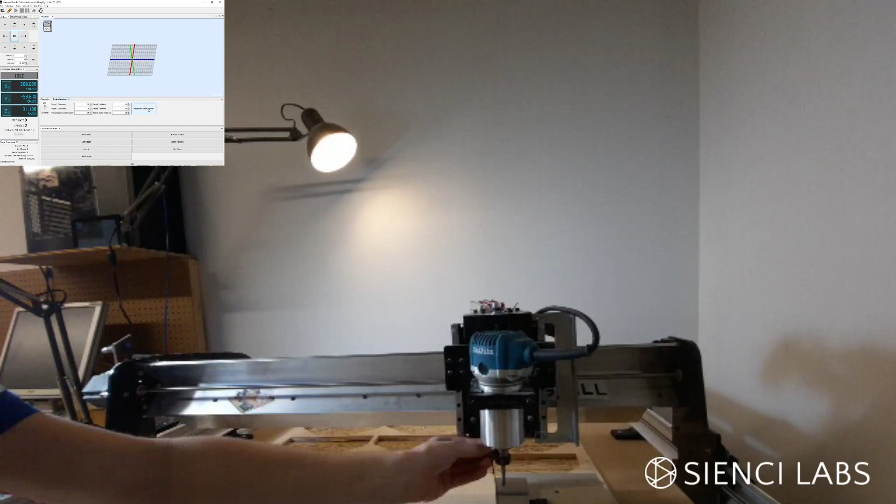Electricity is weird, you're just trying to get a solid connection. You can always use the test you were doing earlier, just touch the probe on the router above. If you want to make sure you're not marking up your probe, you can take the banana plug out, initialize the probe, and just tap it to the bit to make sure you're getting good contact.

And then you can set it up with the actual block. So now I'm just going to click this and we're going to see if the magic sauce happens the way the magic sauce is supposed to happen.

Contact. There you go, are we back online? Okay, it's doing something, I think it might be back because that's where I was standing just a second ago. Yep, we're back, we're back, excelente. It blew up, yes it blew up. Now we're all dead. But we pressed the reset button and now we're alive again. We went and probed it, and then our whole office just exploded, and that's why probing is just... oh hi Louie, even Louie's scared.

Louie's so scared. No sound, how do we get sound? Sound? Can we do the sound? Even Louie's scared. Seems like we got sound. Are you guys able to hear? Oh, sound is good, okay.

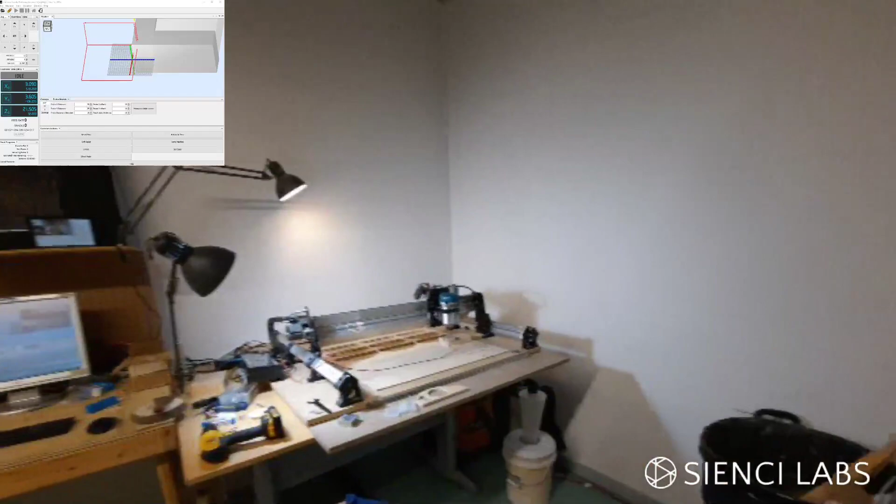So where we were at, we had set up the touch probe. Let's run the UGS probing again, just for funsies, let's run the probe and you guys can see it once again in action. I'm just going to click the same thing in UGS, which is the measure outside corner button. Is it there, lit up? Okay, let's click it.

Okay, so now that the probe has happened, you just remove the block. Okay, our stream's good, seems good? We're going to remove the block here and remove the magnet.

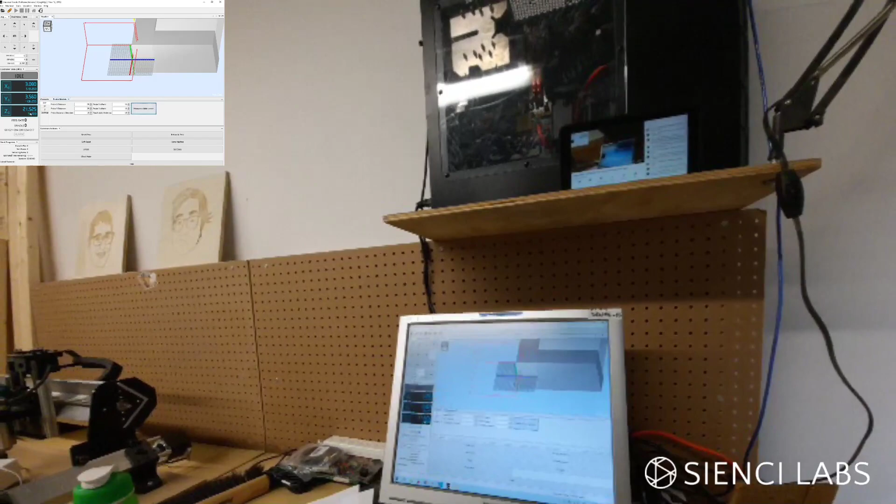Back in UGS, you'll notice that in your coordinates, it's going to be offset by around 3 to 5. This will depend on how closely you were above the circle logo at zero point. It'll be around 3 or 5 in the X and the Y, and about 20 in the Z. Once you hit return to 0, this is going to put your end mill at the corner of the material. You'll see, I'm going to hit it right now.

I want to make a clarification. Those dimensions, after it's done probing, the machine goes back to its original position. So even if you start it from say 30 millimeters from the circle on the Z-axis, your coordinate will be at 30. Which makes sense, because that coordinate is the distance away from the origin point that it just measured.

The reason I wanted to point out those numbers is because if you feel like the probing has gone incorrectly, even though it hasn't given you an error, you can always check those 3 numbers. As I said, they should be around 3 to 5 or 7 for the X and the Y. They could also be small negative numbers, like negative 0.5 or negative 1. The Z is going to range anywhere from 20 to 30 or 35, depending on what height you started at.

That's just a way of confirming that it has probed properly, so that when you hit return to 0, it's going to return to the corner of the material. And you can see it's returned exactly to the corner of the material. So that's doing an XYZ probe. Let me just lift the bit up.

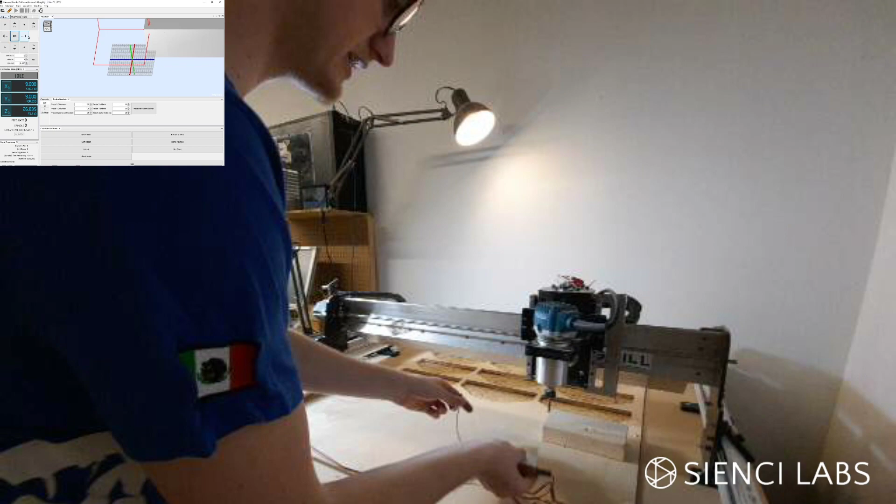And I'll put the probe back in place. Now I'm going to do just an XY. Your bit's not above the circle, by the way. Yeah, I know that. Bring it down one more. There, that's perfect. Alright, so now I've roughly located above the circle again.

Oh, we lost our connection again. Do we? Is the Wi-Fi here still working? Oh, maybe it's just your phone. Right, keep going, keep talking. Oh, okay.

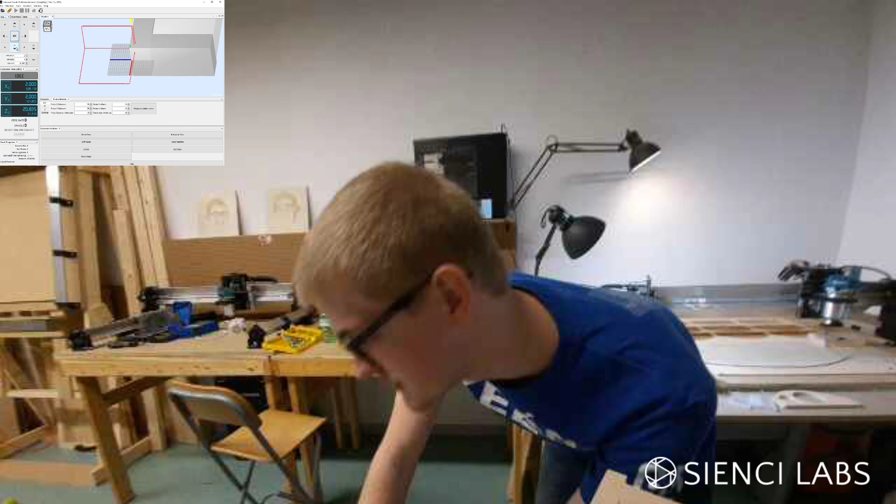Let's see, what are people asking? You don't need to click reset XYZ. Yeah, you don't need to click anything. The act of probing sets the coordinate position. It always will set it for you. That is part of what the probing cycle does. It probes all the sides and it automatically resets your 0 to that corner point for you. So that will now be set. And if you want to ensure that that has been set properly, hit return to 0.

No. Give me connection, please. Do you want to try using the webcam instead of the phone? That's a bit more potato. It is a bit more potato. It's okay, I can do it. Just keep talking, just angle it. Oh.

Hi. So you never have to be setting any other buttons. You just hit probe and it will probe the surface. It'll set your 0, and if you want to double check that it's been set up properly, you hit return to 0. If you hit return to 0, it'll return to the 0 point that it had measured, and you should find that that's at the very corner of the material.

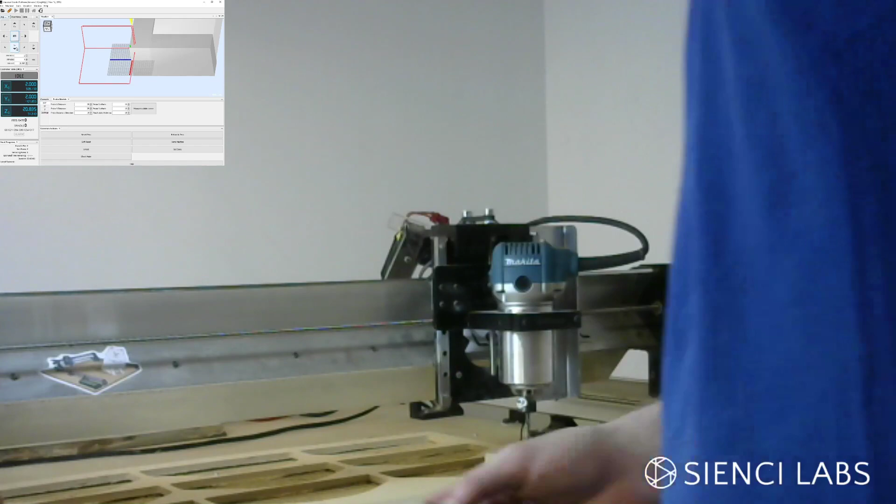Okay, now I'm just going to show the other two probing types. Is there anything else they said? Okay.

So I'm going to switch over to just the X and Y. For the X and Y, you still want to make sure that you're located in approximately the same location, which is by the circle and a little bit above with your end mill. I'm going to click, and if you remember, I set my settings here the same as how I set them in X, Y, Z, and also in the Z. I'm going to hit measure outside corner.

Oh, hold up. This is wrong. Actually, this is a very good demonstration of probing going incorrectly. You can see that it's hit an alarm because it's trying to contact the surface in a way that it expects to be contacting the surface, and since it isn't seeing the surface there, it's thrown up an alarm for me here.

So this is actually a good chance for me to show you guys. When you get this alarm in UGS, basically for the machine's protection, it's going to not let you move, not let you really do anything with the machine until the alarm goes away. To get the alarm gone, where is it? Where are my common actions? Oh, here. Go to the common actions tab, and there's a button that says unlock. You want to click unlock. By clicking unlock, that removes the alarm and it allows you to have control back over your machine. Okay.

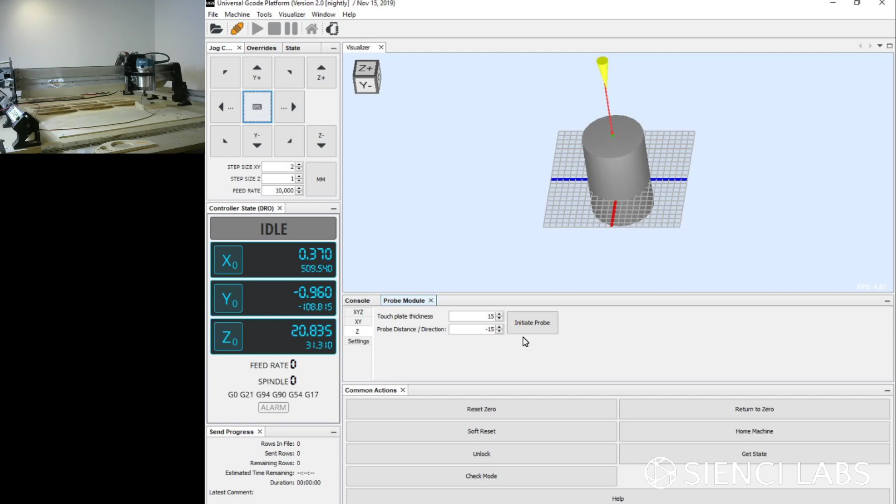You didn't set the settings for the XY. I believe I did. I just think... I can't exactly remember. I think I actually need to position the end mill a little bit differently. Let me see.

In case you guys are wondering, I use the XY probe like once or twice, and this is going to lead into me talking about what probe types, like when you're using certain probe types and why. So I'll explain that later. Let me see what happens when I do this. Excellent.

So you probably saw I made a mistake. Okay, yeah, Josh, you got that right there. So yeah, you guys probably saw I made a mistake there.

I forgot that when you're doing the X and the Y probing on its own, you're actually placing the bit beneath the probe. You can set it quite low if you'd like to. Like I'll move it down a bit of a ways there. Let's see, can I move the webcam a bit closer?

Tilted this, yeah. This way? People want to see the screen, so I had a bit here. You can make the screen bigger? Okay, I'll bring this closer and I can make this smaller too. Oh no, don't go away. There we go, we need you. Okay.

Okay, this might be a bit tricky to see, but basically I positioned the cutting bit, and I'll remind you, this is for just X and Y that you have to do this. I positioned the cutting bit so that it's next to the probe, lowered down, and kind of diagonally next to it.

And this is the point that you want to start the tool at if you want to be doing an XY probe. So now that I've positioned it correctly, I'm just going to show you guys again from a closer perspective.

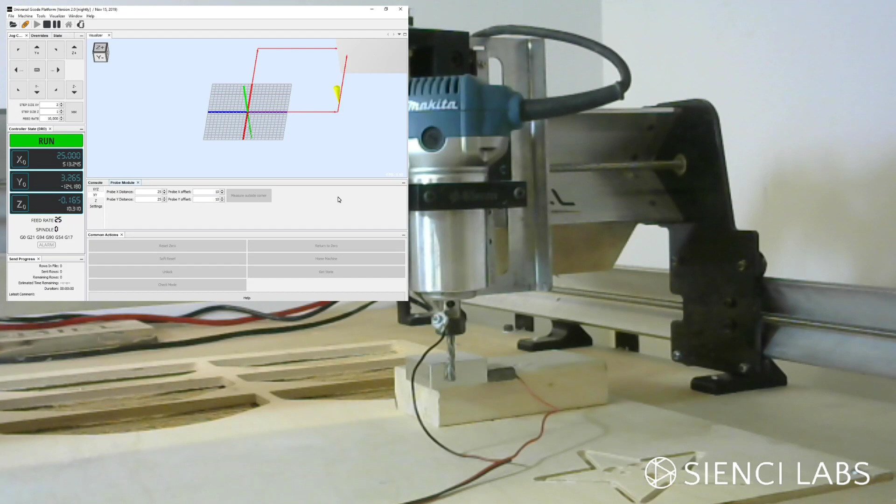I'm going to click measure outside corner, and you see that it's going to move to the side, touch one face, move to the other side, touch the other face. So you can see it's very important that it's offset diagonally from the probe by maybe 5 or 10 millimeters, and then it'll be able to seek in and find those dimensions for you.

When you do this sort of probing, you don't want to take the probe off and immediately hit return to 0. Is your phone working again?

I think so. Okay, can you get nice and close on that? So I don't want to immediately hit return to 0 because you can see that the bit is actually beneath the surface of the material, and we haven't probed the Z, right? We've just probed the X and the Y. That's what we just did. We only have probed the X and the Y. So we don't know what the actual Z height is.

So what I'm going to do is raise the Z up. Usually you'd have a certain Z height already set, which is why you're only probing the X and the Y, but I don't, so I'm just going to zero the Z just to make sure I don't run into the material. But now I'm going to hit return to 0, and you can see that it hasn't set the Z because I haven't measured the Z.

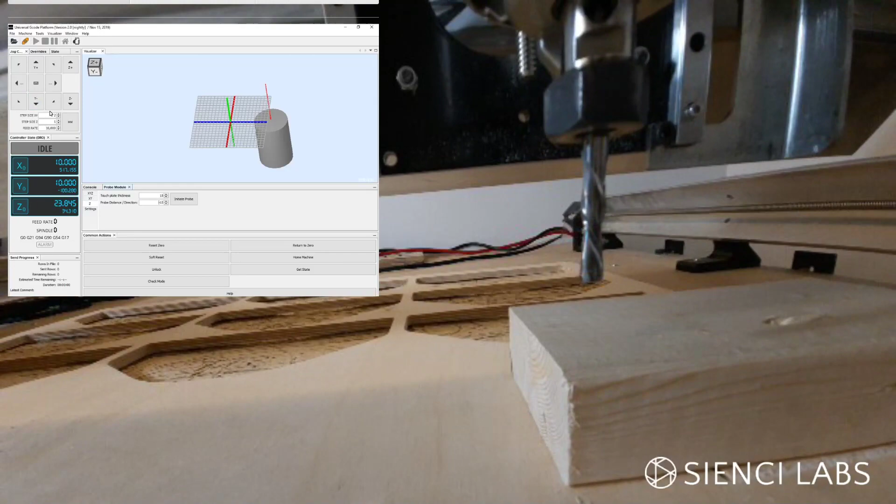Okay, and now that I've probed in the Z, I'm just going to show you that when I tell it to return to 0, it's going to bring the bit down right to the surface. See? It's right there at the surface. So that's a successful Z probe.

If my probing is not happening near the corner, but happening maybe somewhere near the center of the material, then you do a slightly different configuration. I'll show you that as well.

So obviously, if I have this probe, the 15 millimeter dimension is this dimension here, but there's a lip. So if I try to put it like this on top, the distance from the top here to the material is no longer 15 millimeters. It's actually 20 millimeters because this lip is 5 millimeters in thickness.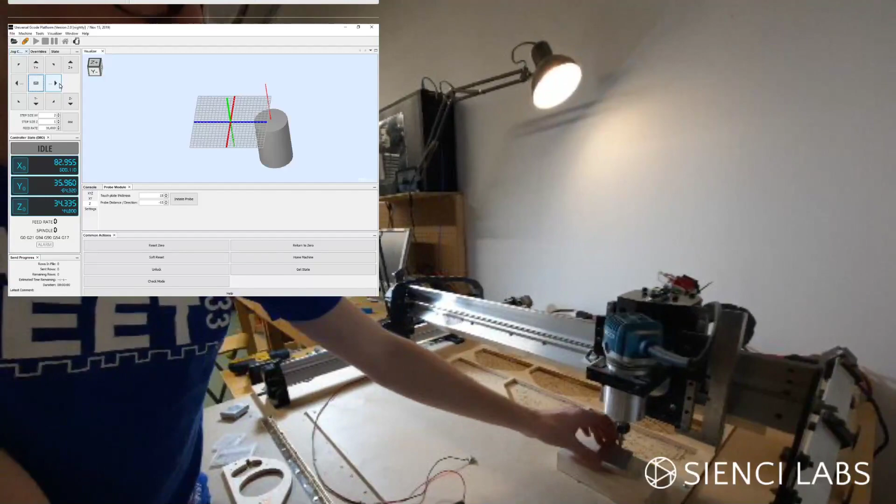So I don't want to change my Z probe setup because I've already got it set up for the 15 millimeter spacing. So what you actually do is just flip it over. I just flip over the probe, make sure the banana plug's still in there, and I'm just going to touch anywhere inside of this lipped area here. Obviously make sure your magnet is stuck back on.

And now back here in UGS, I'm just going to hit to initiate the probe again.

You get an alarm? Oh yeah, I did. It might be because your Z height is too far. You might want to... Oh yeah, I was too far offset. So it was only seeking for the top of the probe. If it feels like it's traveled too far to seek to find the probe, then it'll give you an error and say, I don't know if the probe's actually there. I don't know if I want to keep moving, so I'm just going to stop. So in that case, you get an alarm. You can also see down here, alarm probe.

So I'm just going to unlock that. I'm going to move the Z height up a bit, but just make sure I'm not offset by too much here. And I'm going to go and initiate it again. There we go.

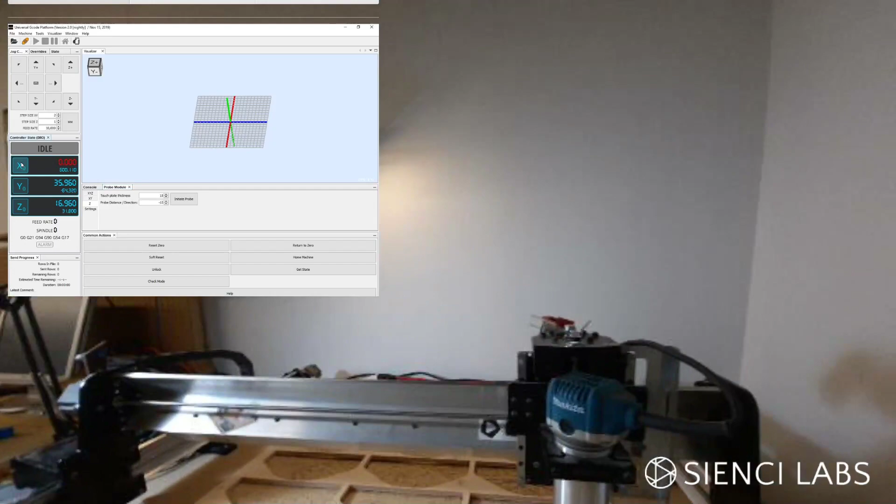And now I'm going to remove that. You want to move it off the machine because if you run it forward and it hits the wire, it'll do bad things. Like if you're starting an actual job, make sure this is out of the way. But if you can focus in on that again, I'm going to hit return to 0. And you can see the bit is right at the top.

Now, I think this is a little bit off the top, further off the top than it should be, just because this is a 2x4 and it's not very flat, as you can see. But if the top of your material is flat, then this would give you a very accurate reading on the surface of that material.

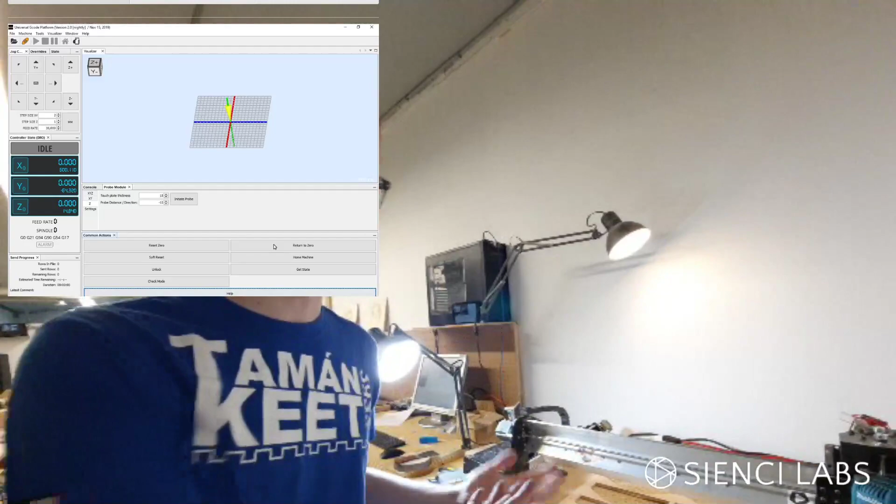Okay, so when would you use these 3 different types of probing setups? Because they are all measuring different things. You can measure all 3 coordinate systems, or the X and the Y on their own, or the Z on its own. So why would you choose one over the other? And are there circumstances where you might not use any at all?

Well, I'll try to give you my best explanation on when I would use a probe and when I might not even use a probe at all.

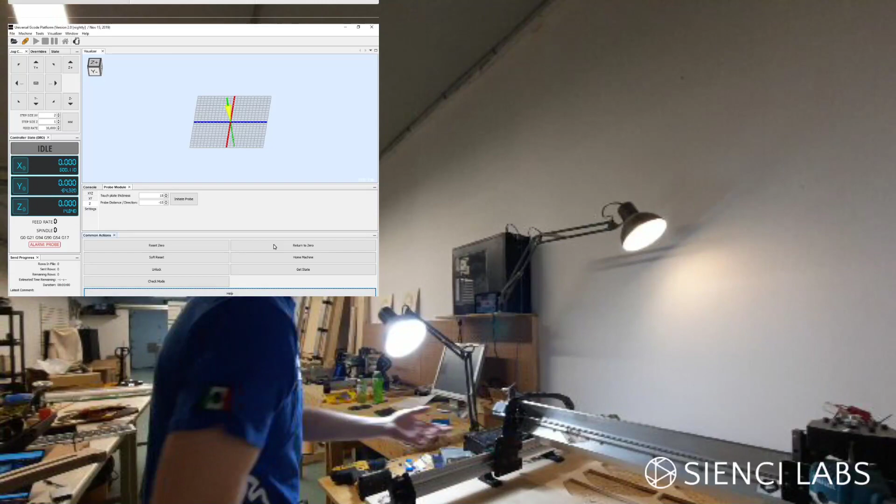So if I am cutting out of sheet material, like something like this, where I'm actually going to position — let's say I'm cutting out this star guy here, which I'm going to be showing you in a minute. If I'm not trying to put it at the corner, there's a screw here, and this is a very large sheet, I can choose anywhere that I want to put it. So if I'm setting up a job like this on a large sheet and I don't really care where it ends up, I can just jog the machine around and just place the bit roughly somewhere. Let's say I'm just going to jog over here, and jog over here, and lower the bit.

Let's say I want my star guy to be here, then I can just finish bringing the bit down. I like to use the pulley here to do it, and you can feel when it's touched the top of the material, and then I just reset 0 in UGS. That is now the cutting point that you can start at, and my star guy — because in the program I've set the origin as the corner — is going to get cut out in this area here now.

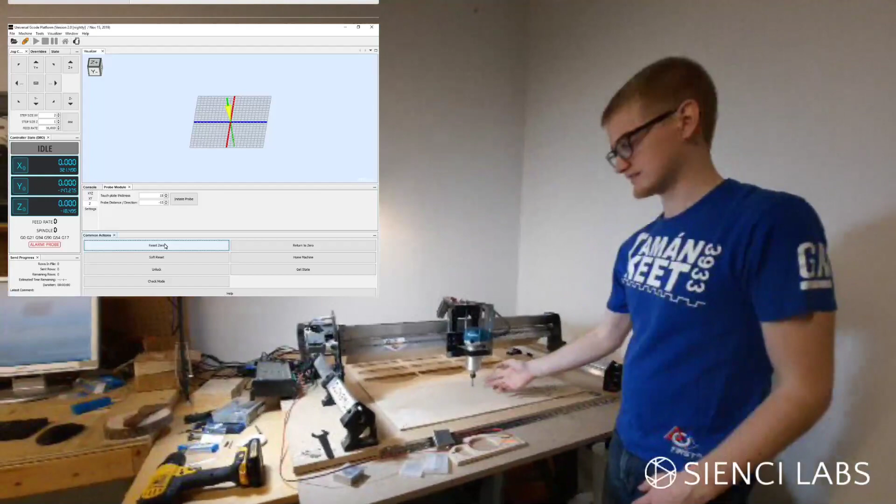That doesn't require any probing at all. And obviously it's not exact, but this plywood is a little bit warped, and I'm sure it's not an exact thickness, etc.

Trying to probe the exact top of it might not even make sense, and trying to position it in the X and Y also might not make sense. So that's one situation where you don't really need a probe to set it up. If you want a slightly more accurate reading on the top of a surface without using a probe, you can use a piece of paper. Raise the bit up by hand, put the paper underneath, and keep moving it back and forth as you slowly bring the bit down. As soon as you feel it catch on the paper, you know the bit is about 0.1 millimeters off the top of the surface, which is close enough to start your job.

It's 5:06 now, I have to go soon. Do you think you can wrap this up in 10 minutes? I suppose. Okay, let's try to go. We'll have to pick up the pace, I suppose.

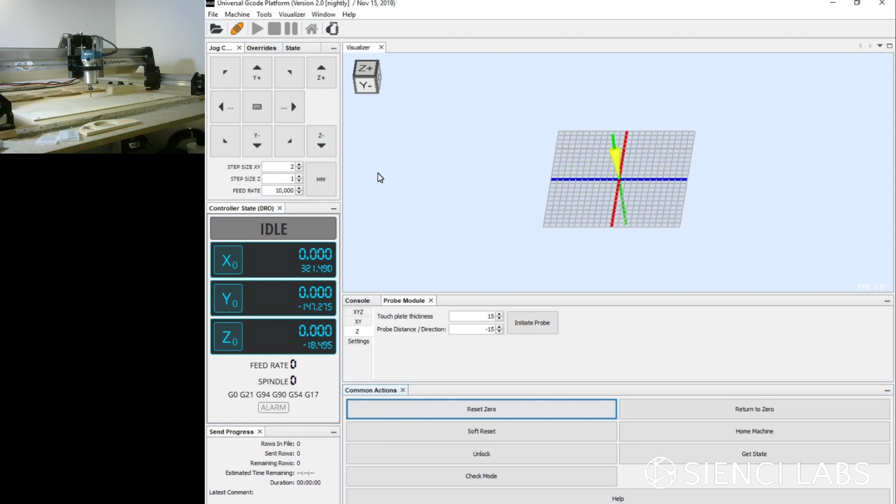One thing I wanted to point out really quick: if you ever feel anxious about moving your machine around, I should let you know that if you run the machine into its limits, it doesn't affect the machine at all. It'll make a bad noise, but it doesn't damage anything. Let me just do that here for you now.

I'm just going to intentionally run it into the side. It just makes this noise. This is because we've designed the machine so it has enough torque to cut out a lot of awesome stuff, but at the same time, if you accidentally run it anywhere it's not supposed to go, like even up in the Z, it's not going to ruin your machine. I wanted to tell you that because I feel like it would make you feel more comfortable working with it.

We've never broken this machine. The Longmill doesn't break. The only thing that breaks on it is the end mills. So I hope you find that reassuring.

But anyway, I'm going to switch back over to this because I need to go fast. So I'm going to set my machine to the Longmill. I'm going to be importing my surprised star guy that I just modeled up, and I'm going to set the cutting location as the corner just by toggling the check box here, and I've set it as a quarter inch end mill in the tools here.

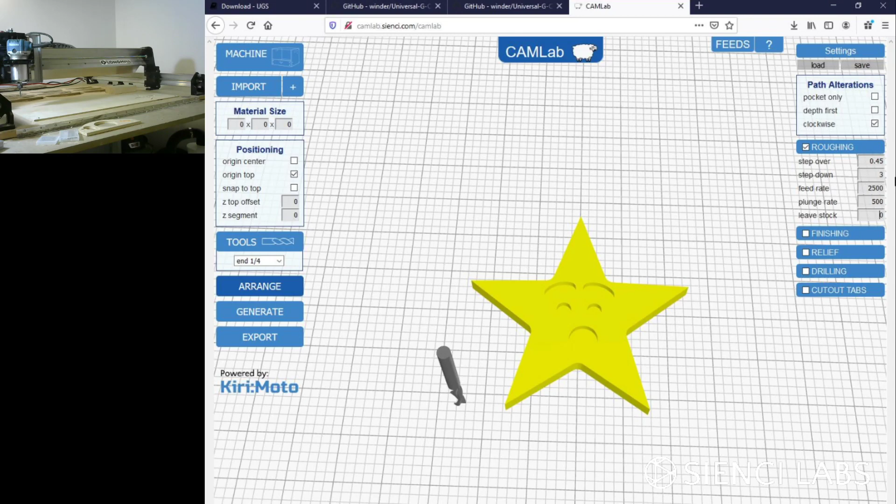And all I'm going to do is just a roughing. For woods, I tend to use like a 0.45 in the roughing, and I'm actually just going to enter in whatever I want off the top of my head. The reason why is I'm just trying to show you guys that this machine can be very forgiving to use. So I'm just going to do that, and I'm going to generate.

And now you can see it's got all of those lines that it's going to follow in order to cut things out. I'm going to export the code, save it as surprised starman.

Okay, then I'm going to navigate to it in UGS, open up my surprise starman, and you can see the visualization is popped up here.

So now I'm going to bring the cutting head. Let's make them right next to our other surprise starman over here.

You mind switching to the phone view just so you can get closer? I have a dog on my lap. Oh, okay, I'll try to move this closer then.

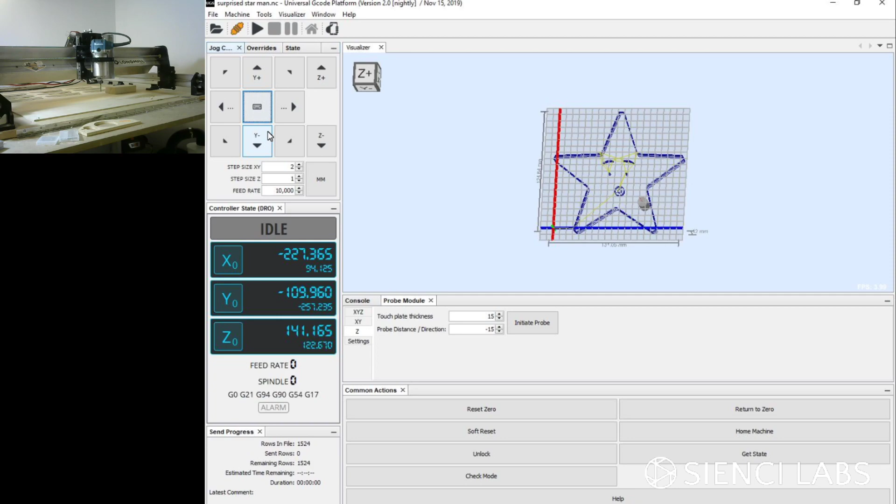I'll bring this. Tell me if things are in view. I can't really see if it's looking in the right place. And I'm going to bring that down.

And I'm just setting this up the same way I showed you. You can see even the plywood isn't super well supported, but it's set up well enough. And then over here, I'm going to reset my 0 point.

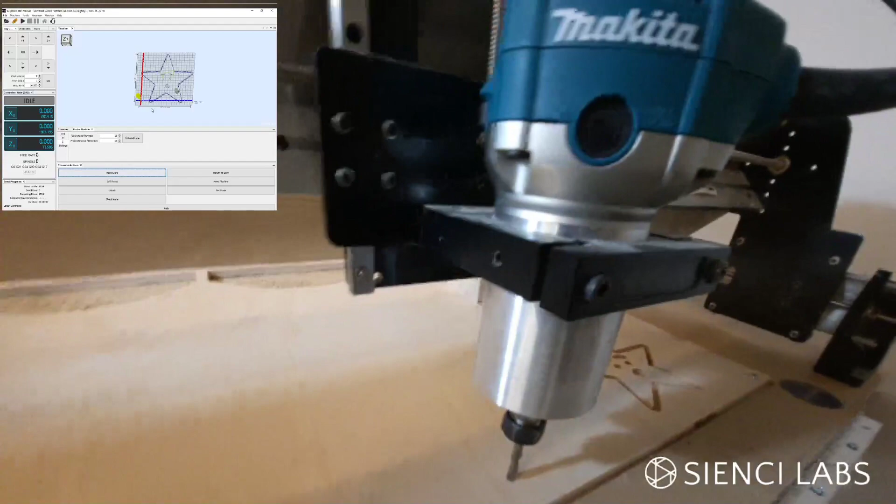You could also click all of these to reset it. So now you can see in the visualizer that my bit's starting here. My Starman is going to be over here, and you can see that I've got space for my Starman there.

And I've just got the router set on like 3.5 or 4.

So before I start the job, I'm actually going to raise the z-axis up. I tend to raise the z-axis up before the job starts, because when the job starts, it's going to move in the x and the y first, and then it's going to drop down in the z to start cutting. So I tend to zero it, raise the z up, start the job, and then it's going to move to its position, move down, and start cutting.

So you can see it's raised up. I'm going to put the dust shoe on, and I'll stick the hose on. Here, give me the camera.

And I'm going to turn on the vacuum, and turn on the router. And then I'm going to hit play. Can you focus in on that?